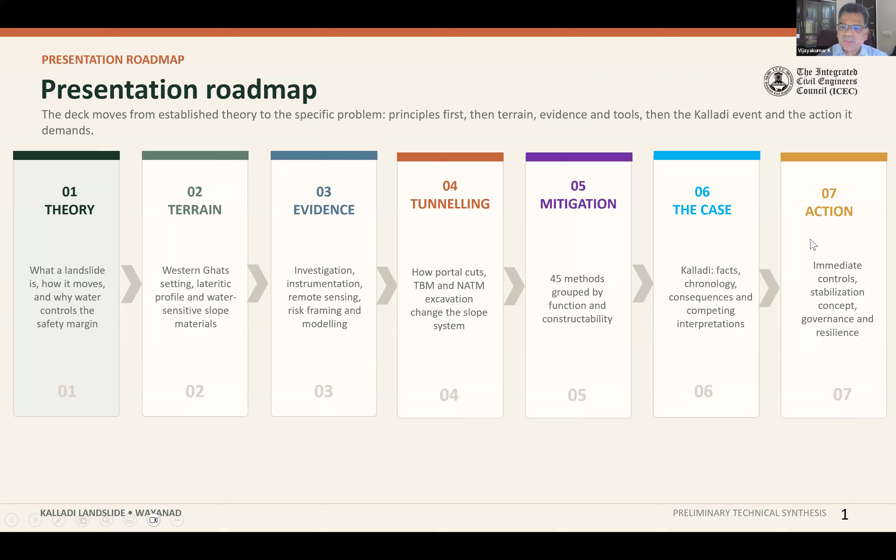Then evidence-based and important caution - these are from the text we will discuss. This is the Kalladi case briefing and landslide in practice. As I told you, there are 45 methods in that mitigation catalog.

So landslide dynamics, classification, monitoring, susceptibility and risk, soil nailing, bioengineering, numerical modeling comes under theory, practice and modeling. Points like location, preliminary event facts, rainfall and groundwater, competing interpretation, warning, construction, and governance lessons come under Kalladi case briefing. Investigation, groundwater, shear strength, stability analysis, 45 stabilization methods, construction control, and case history learning comes under landslide in practice.

So the caution is, please note down this point. Reported casualty, rainfall, and warning information is presented as a dated public record. The expert committee's final reconstruction should govern any legal and definitive attribution of cause.

Now the executive takeaways - there are 5 points which I want to highlight. Trigger is not a cause. Intense rainfall may have triggered the failure, while geology, slope disturbance, drainage, loading, and warning response practices shape susceptibility. Then mechanism first - slip surface geometry, classification, water regime, and movement mode must be established before stabilization is chosen.

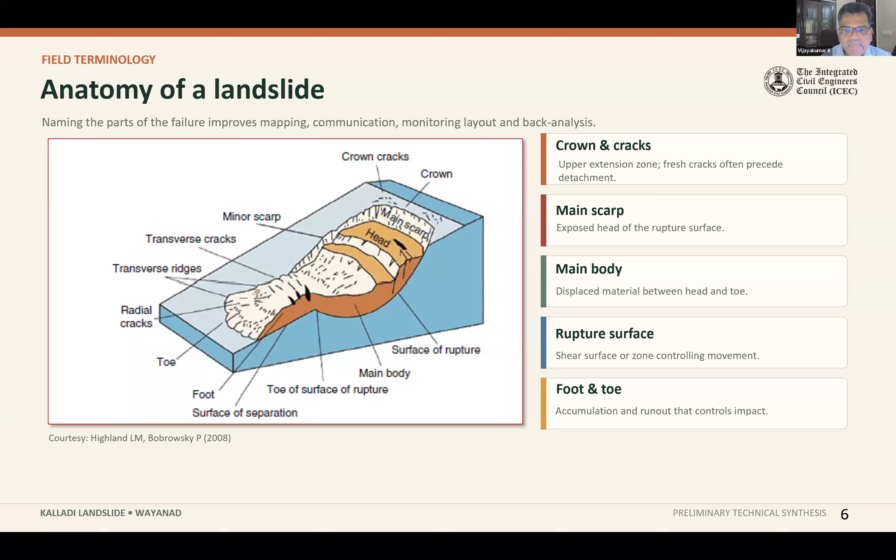As we discussed, there are six types of movement. First is fall. Fall means imagine a rock boulder falling from a high elevation to a low elevation, so it will bounce or roll. That comes under this category, falls.

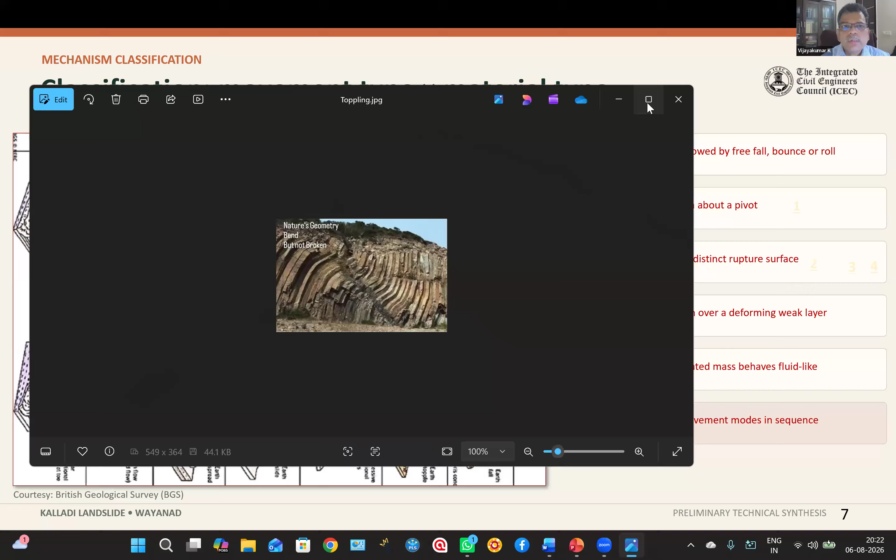Topples - I will show you a picture so it will be easy to see. Yes, it is visible. So this is the topple. Topple means there will be some type, for example basalt - columnar basalt. Once you excavate this, it will topple. You can imagine that. So this type of movement mode is called toppling.

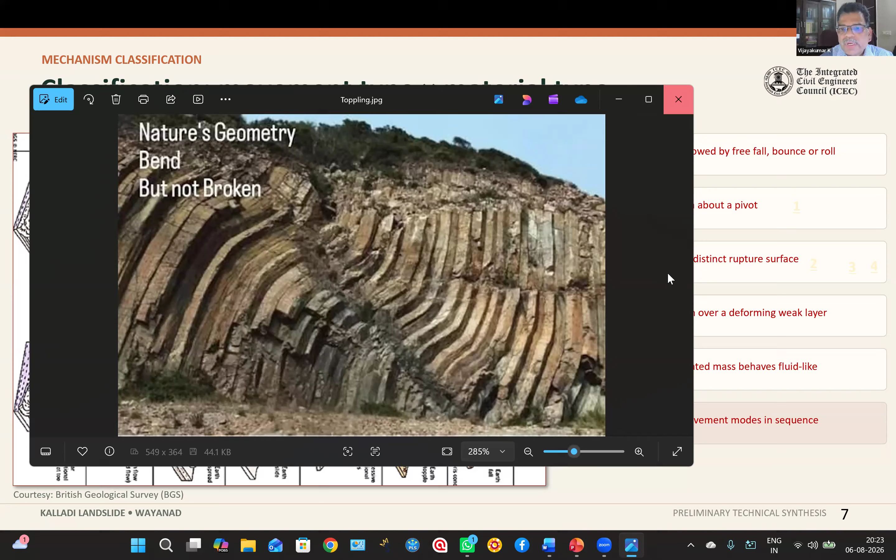Then slide - this is the toppling shown in the second column from the right. And in the third column, there are six main columns. This slide can be translation along a plane or rotational. I will give you a picture of this slide. I hope it is visible. Yeah.

So this rock can move along a plane, so it is called planar failure. The rocks - these are the joint sets actually - so it can move along a plane. This type of movement is called planar or slide. This particular slide is called planar failure, which may lead to planar failure.

Then another thing I would like to show you is circular failure. This is rotational - see, this is rotational. There will be a surface arc type of thing, and it will slide like this.

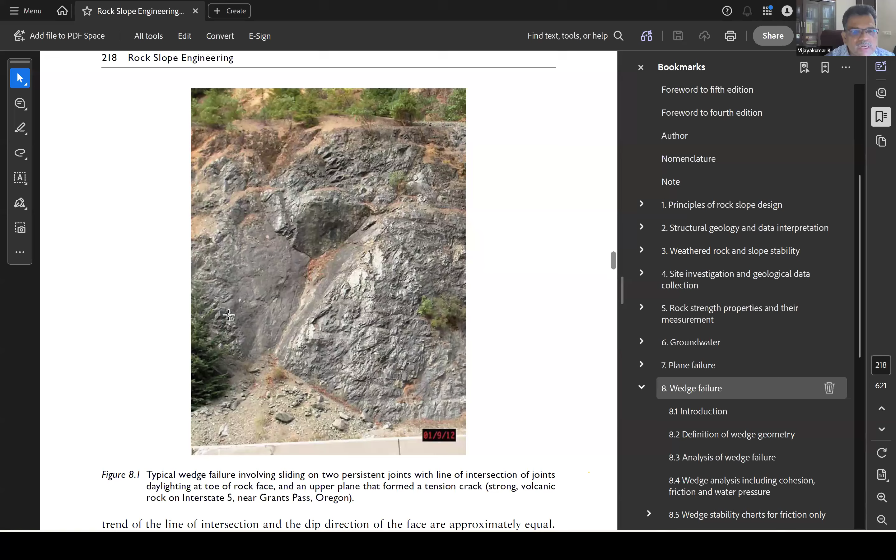Then another type of planar failure is wedge failure. I will show you that one as well. In this wedge failure, you can see it forms a wedge. There are two planes and a third plane, that is the scarp we told about. So this type of plane failure is called wedge failure.

Now next is spread. Spread means lateral extension - here it can be seen, lateral extension spreads. Flows means it is remolded, the material is remolded, saturated mass behaves fluid-like. And the last one is complex - complex means two or more modes in sequence, either of these two modes or more than that.

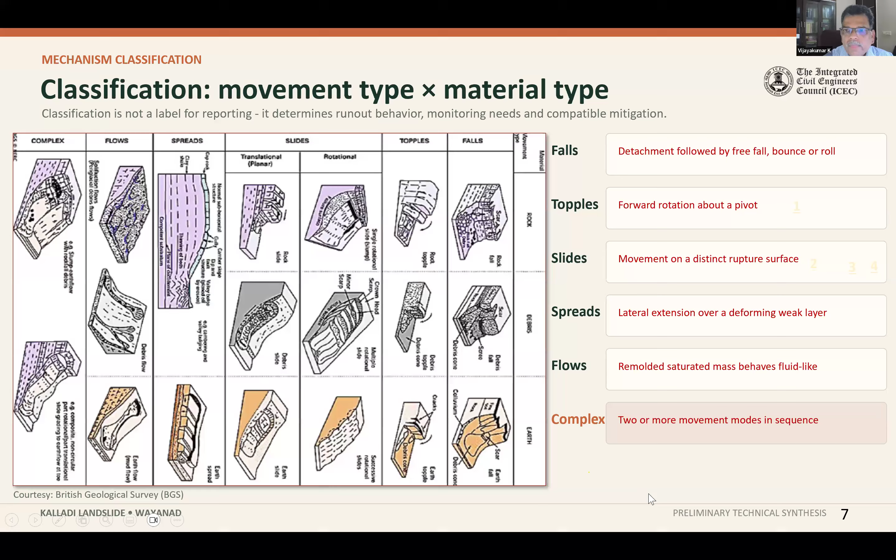Now let us see the velocity. We told movement type, then type of landslide, and then the third one is the velocity.

Water-rich failure can begin as a slide, remold, and entrain. Entrain means it fuels material and continues as a debris flow. Slide means, we already discussed about slide - a distinct rupture surface will be there.

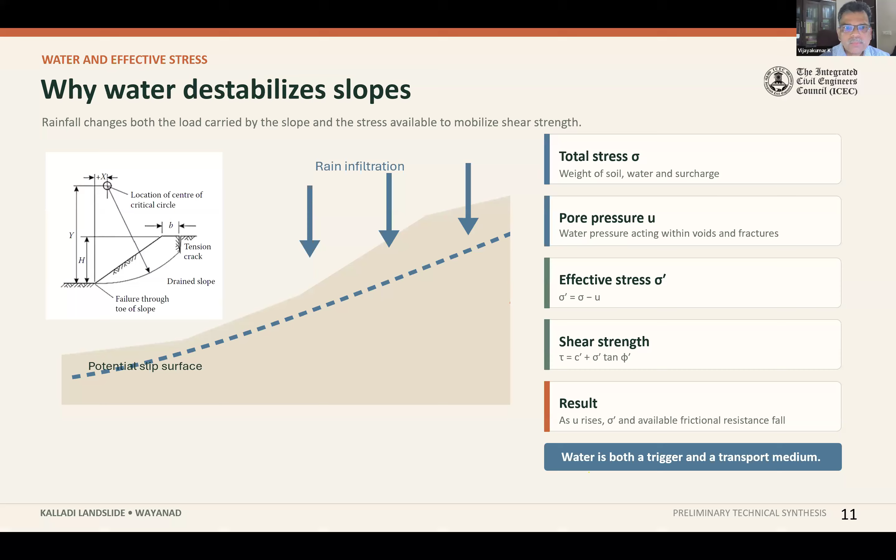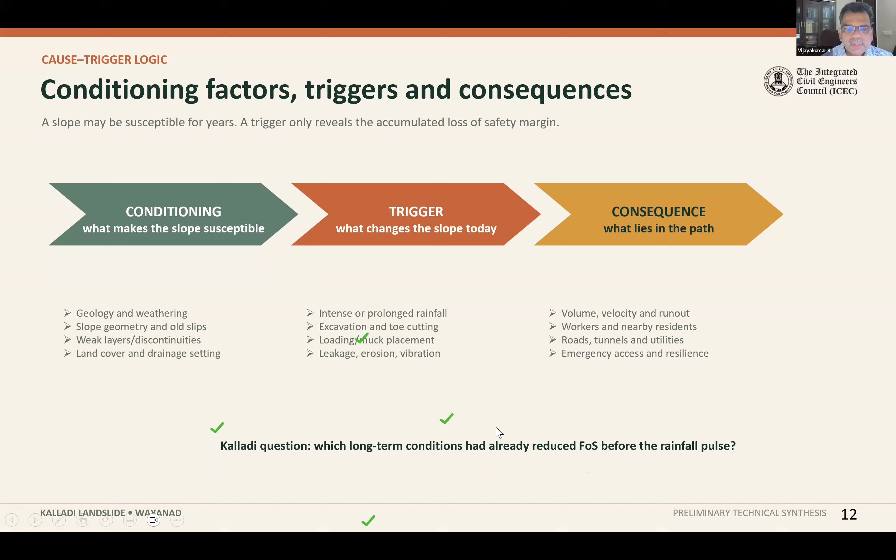Now let us see the field warning signs that require action. Small changes are valuable when they are documented, compared, and linked to an explicit threshold.

Cracks are actually not costly to find, because even with the naked eye we can see them. I will show you a picture from one of the projects in Assam.

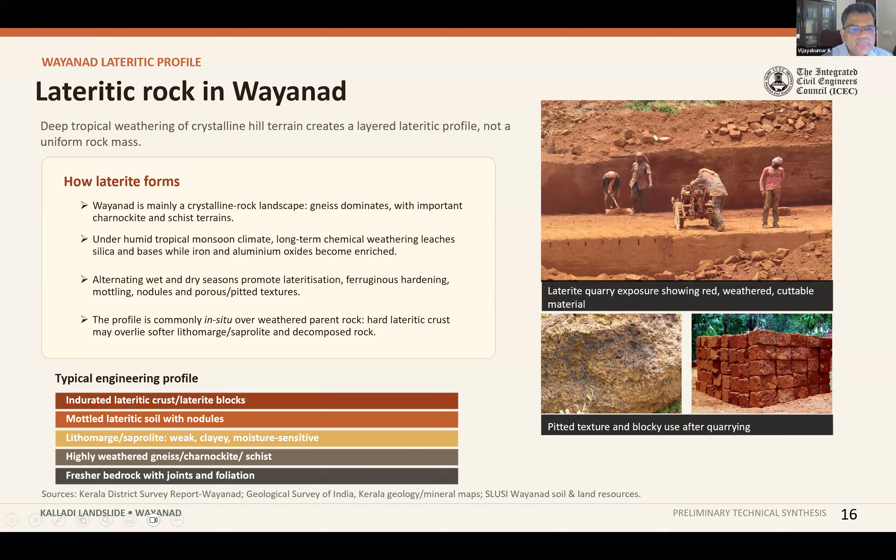The peculiarity of saprolite is that it is weak, clayey, and moisture sensitive. It can absorb water. This next point is about lateritic soil overburden and slope stability.

Hard crust can give a false impression. So while drilling a borehole, if you get a rebound, we should not stop there, because it can give a false impression of strength, while the underlying saprolite is very weak, then jointed with parent rock further down, and fissures are present. We will discuss that point.

Then cut slope exposes the profile and removes confinement. If you cut a slope, the confinement will be removed and allow rainfall to enter cracks, benches, and unsupported faces. So here there are three points.

The last point is that blocks, boulders, and loose lateritic debris can be entrained during a slide. It can start as a slide, as we discussed, then it can transform into a flow, increasing runout impact. So we have to investigate.

The main point is drainage. Drainage is the basic method for making a slope stable. So without drainage, in this type of lateritic, soil, or material area, we cannot make a slope stable.

So here the checks for lateritic slopes are very important. Thickness should be mapped, permeability, seepage path, water table, and storm response checked with drains and piezometers. I heard that in Kalladi there were no piezometers installed.

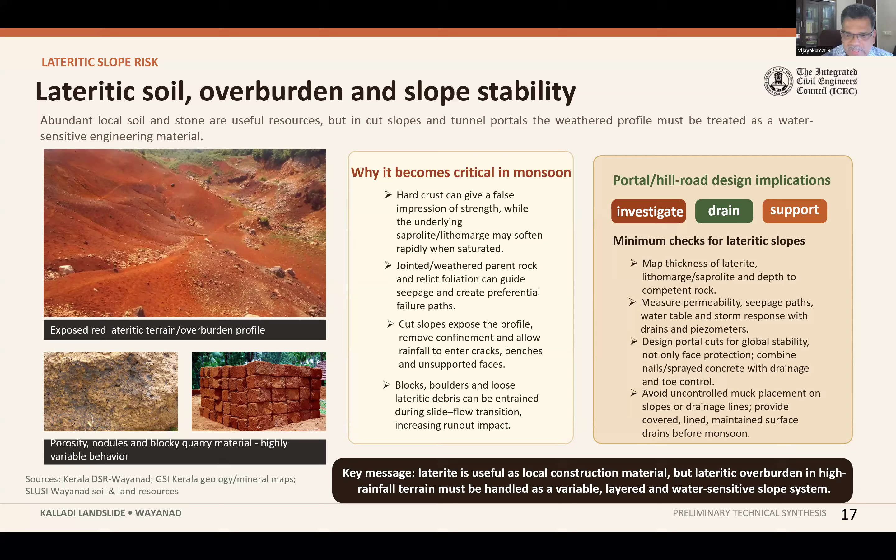When the cut removes confinement, that is, when we make a slope, the hydraulic gradient increases and water may heave, erupt as a spring, or trigger sliding or mud flow. It can start sliding and mud flow. All these should actually be part of forensic investigation, and all these things should be considered. They should consider it, obviously, I hope.

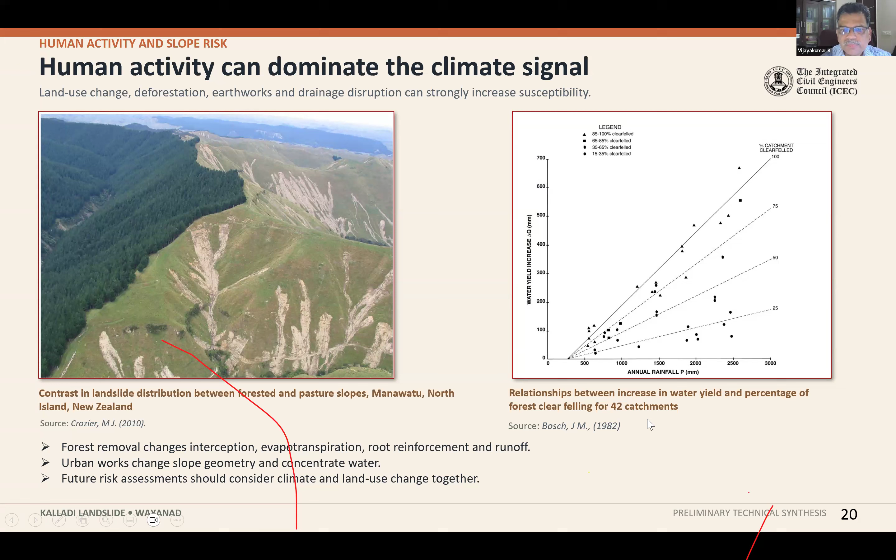So this is an article, and they have done intensive research from 42 catchments. Bosch, in 1982.

Now we talked about mechanics, then ground. Third section is investigation, monitoring, and risk. That is the proof.

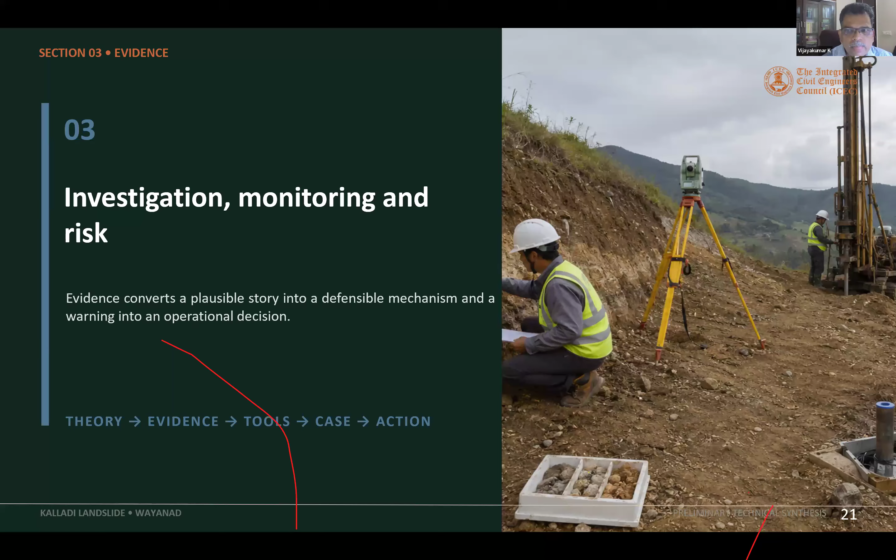So what should be considered in investigation? Geomorphology, the scarps we discussed. Hummocky ground means small hills or undulated grounds. Old slides, earlier slides were there that we have to investigate. Drainage lines, path, runout, topography, surface transport deposition geometry, and slope profile.

Ground profile, fill or colluvium. Colluvium is nothing but if the material is weathered and static, then it is called residual. So it's the second one - if it moves to the foothill, then it is called colluvium.

Weathered rock, sound rock, joint discontinuities. Orientation - joint orientation means dip and dip direction. Then persistence - what is the length of the discontinuity? Infill - what is the material in joints? Aperture - what is the gap of the joint? And water condition - groundwater seasonal level.

Usually what I've seen in a few geotechnical investigation reports is that they measure the observed water during drilling only, but we have to see the seasonal levels, perched water, seepage, and storm response. Strength of the material, peak, drained, undrained, residual strength, selected by mechanism, construction strength, cut geometry, support, stockpile - all these should be noted in the investigation stage.

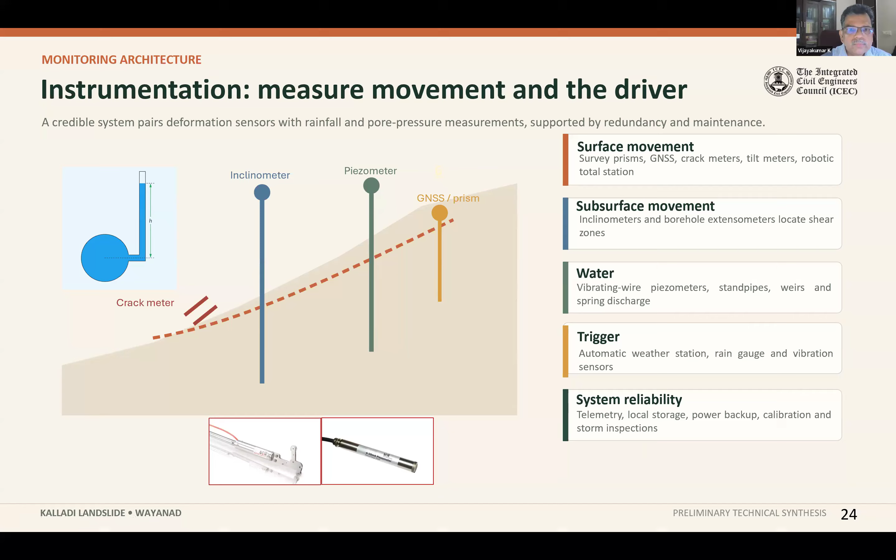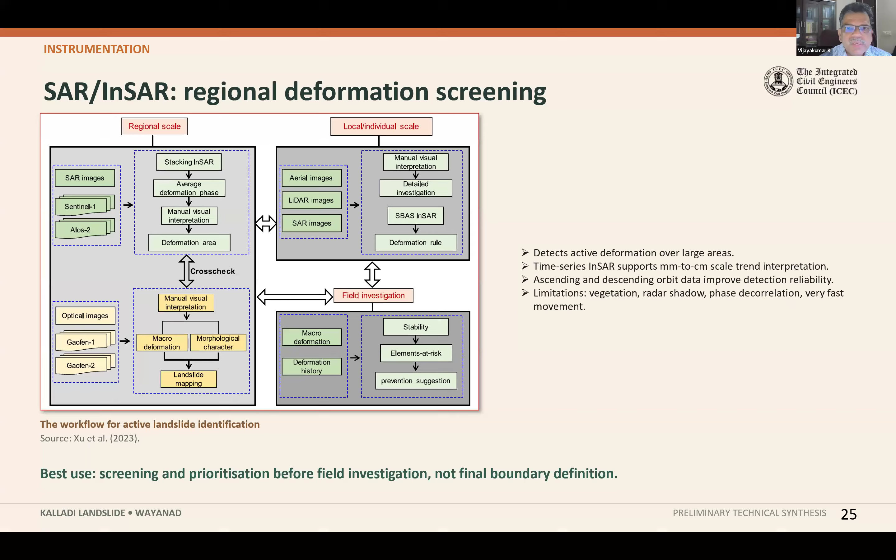Best use - screening and prioritization before field investigation, not final boundary definition. It's not a design tool, it's a screening tool only. Then threshold.

For monitoring, the threshold should combine rainfall, pore pressure, and movement rate, then be validated against the local response. I will go a little bit fast because we only covered 27 slides.

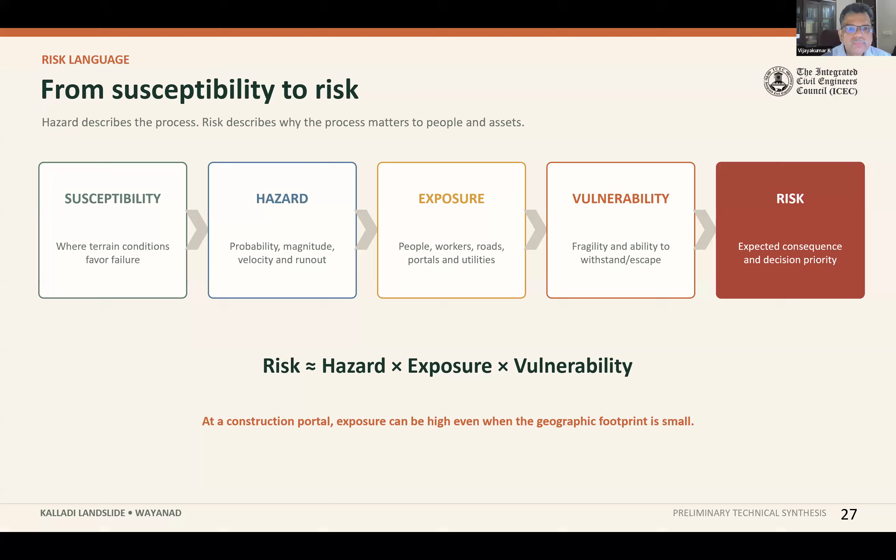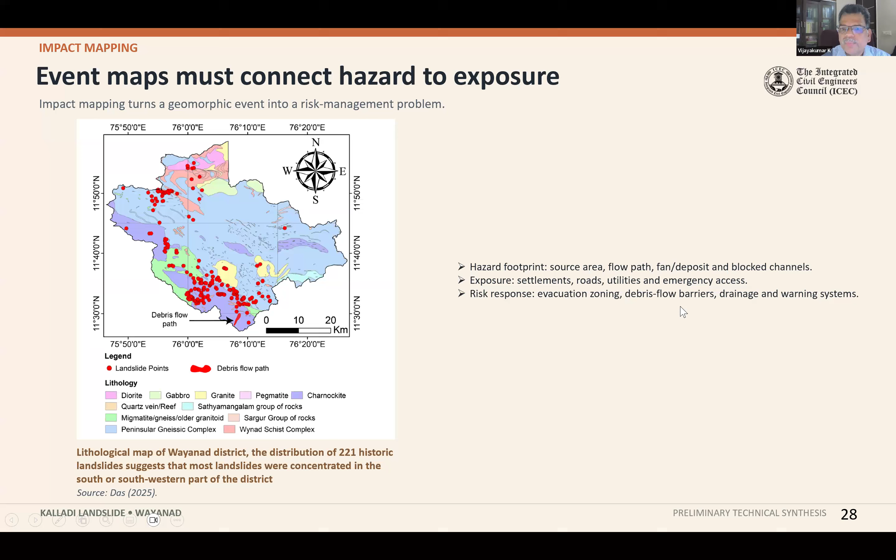This is the event map I took from Das et al., 2025 paper - source area, flow path, deposit block channel, exposure, settlement roads, utilities, emergency access. We told exposure in the previous slides. Risk responses include evacuation zoning, debris flow barriers, drainage and warning systems.

Modeling - for the modeling toolbox there are a lot of methods. One is limit equilibrium, which we usually use in GeoStudio or RS2, Plaxis, etc. There are a lot of methods you are aware of.

Janbu's method, Bishop's method - a lot of methods are there. Finite element using Slide or Plaxis we can use. Then finite difference - FLAC is one of the methods, one of the softwares.

Rainfall infiltration models will give transient pore pressure and shallow failure timing. Runout debris flow models give velocity, depth impact, and exclusion-zone design.

Probabilistic analysis - there won't be a single factor of safety, but there will be some reliability index or something like that. The most influential ones are groundwater condition, residual strength, slip surface geometry, construction sequence, and runout rheology.

Out of these five points, only four points are related to investigation, so investigation should be considered with paramount importance. Only construction sequence is left.

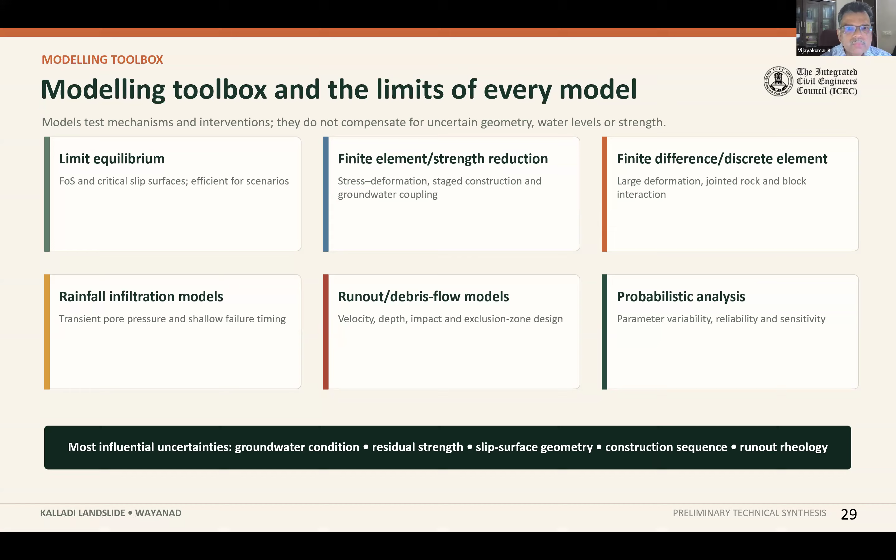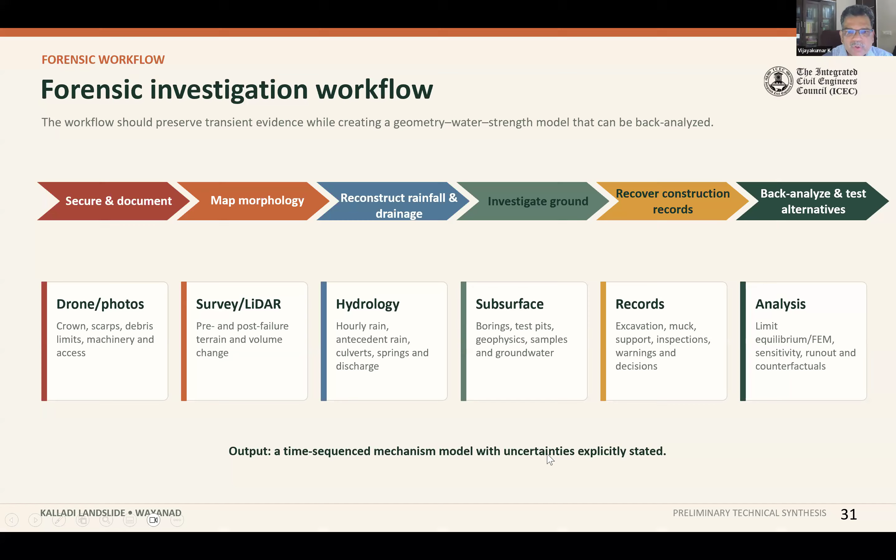Forensic investigation workflow - there are six drivers: secure and document, map morphology by survey or LIDAR, reconstruct rainfall and drainage hydrology, investigate ground subsurface through boring test pits etc, then recover construction records - that's an important point. Then back analysis, which we can do using limit equilibrium, FEM sensitivity, runout, and counterfactual - a time sequence and mechanism model with uncertainties explicitly stated.

Next is tunneling portal risk in hilly terrain - we'll go fast. I will discuss NATM tunneling only, because TBM is not considered in this region; earlier they have not considered it in the Kalladi region. The New Austrian Tunneling Method is one of the tunneling methods used in tunnel excavation, involving stress release. Then delayed support - suppose the support is meant to arrest the collapse; if you delay it, that will trigger settlement. Then groundwater inflow.

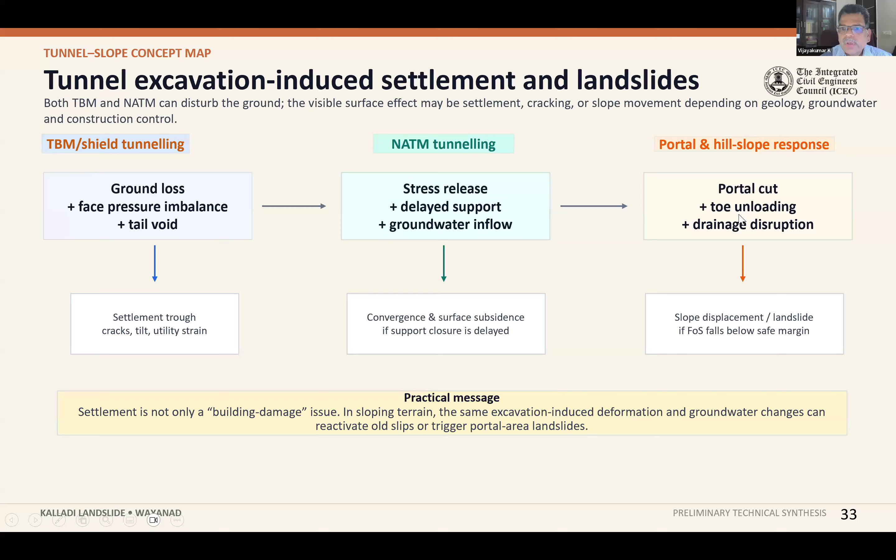Similarly, for portal and hill-slope response, we have portal cuts, toe unloading, drainage disruption - this is for settlement. I will skip this one because this is for TBM settlement, and for NATM we can see controls.

We can reduce the round length - how much quantity we have to excavate in one round. That can be reduced using pipe roofing or fore-poling spiles etc, face bolts and drainage holes, rapid rings. These are some remedial measures to reduce excavation settlement.

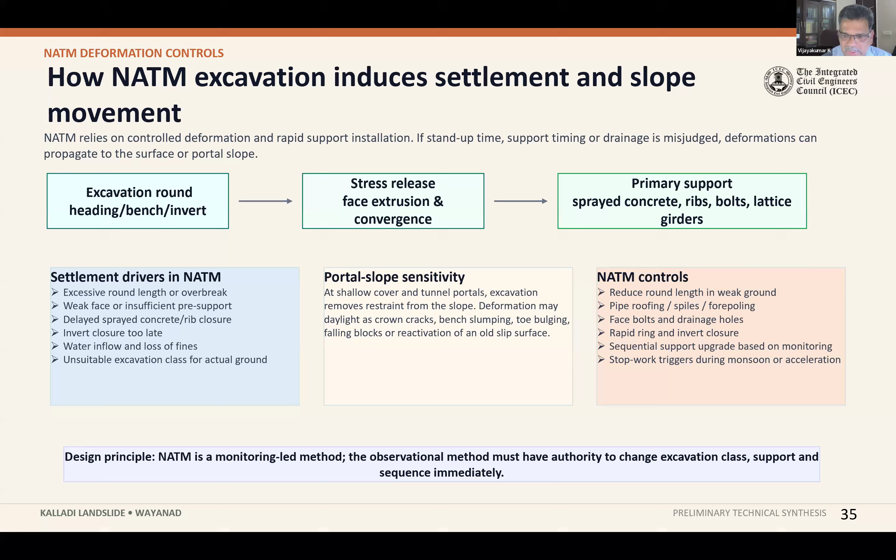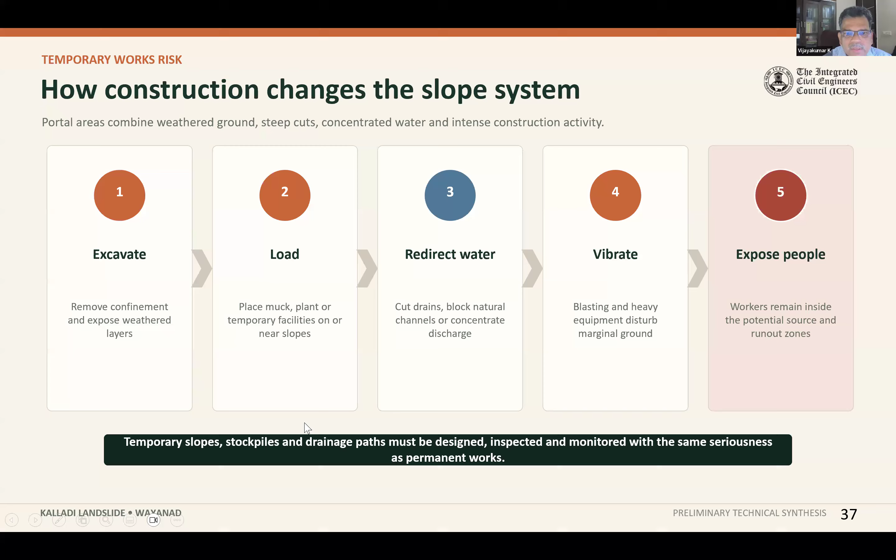I think I can share the slides, madam, so the people can read through. Yes sir, later this can be read at a later stage since we have few minutes - maybe we can skip to the Kalladi's slides.

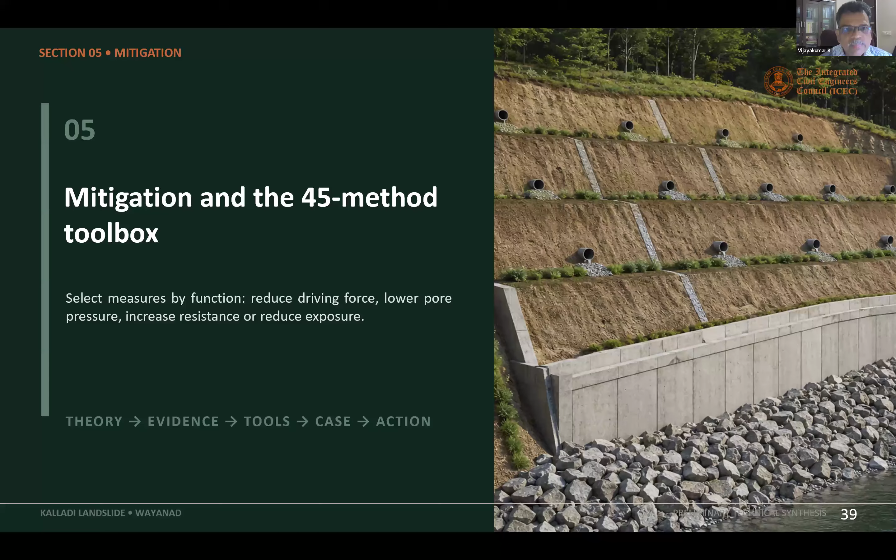So next, there are seven divisions; the fifth one is mitigation, with 45 toolbox methods. I will skip this one - we can read it later. One point I would like to highlight is that out of these 45 methods, 13 methods are related to drainage and dewatering, which shows how important it is.

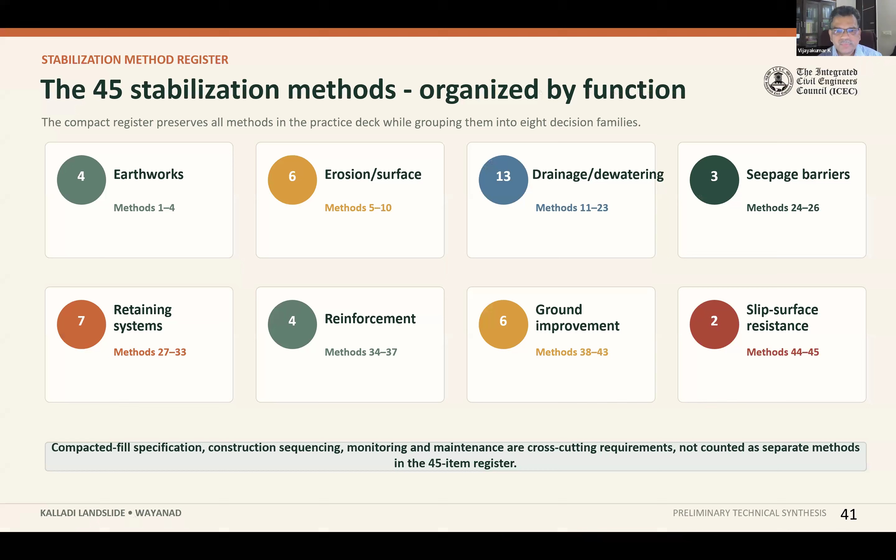So I have mentioned all the methods, mitigation methods. So this I will skip. So here I would like to say something.

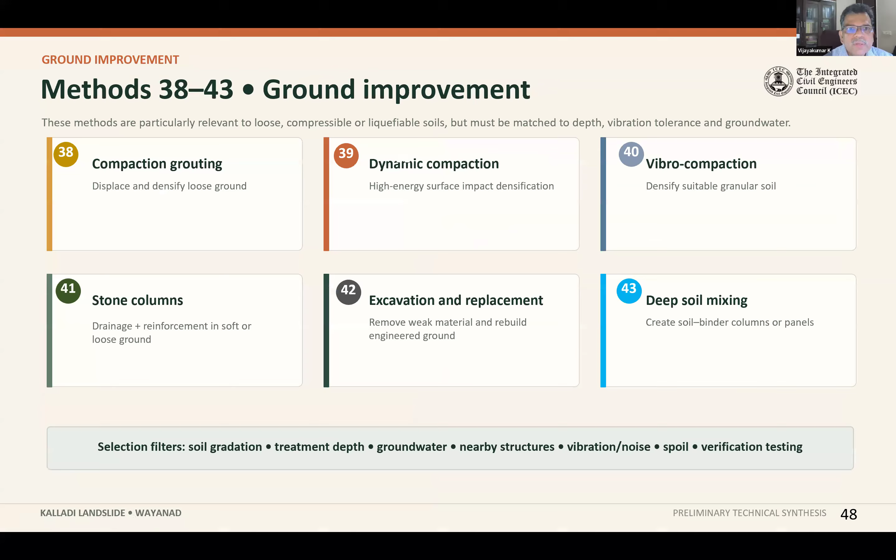Now we will see these are the 38 to 43 methods, 44 to 45 methods, and then where to use, what method to use under which condition. So this I have explained, I tried to explain here in this slide.

Then Kalladi, this is the case actually. So we know all these things. So it happened in July, 7 to 8 reported deaths, 9 reported injuries, and the contractor says it is because of natural calamity. I will just show this letter from the contractor to BC Limited.

They mentioned that it is because of natural calamity and 265 millimeter of rainfall in 24 hours. So here my point is that we have to see the antecedent wetness as well. Not only the 265 millimeter in 24 hours, we should consider the antecedent wetness also. So in the forensic investigation, that should be considered.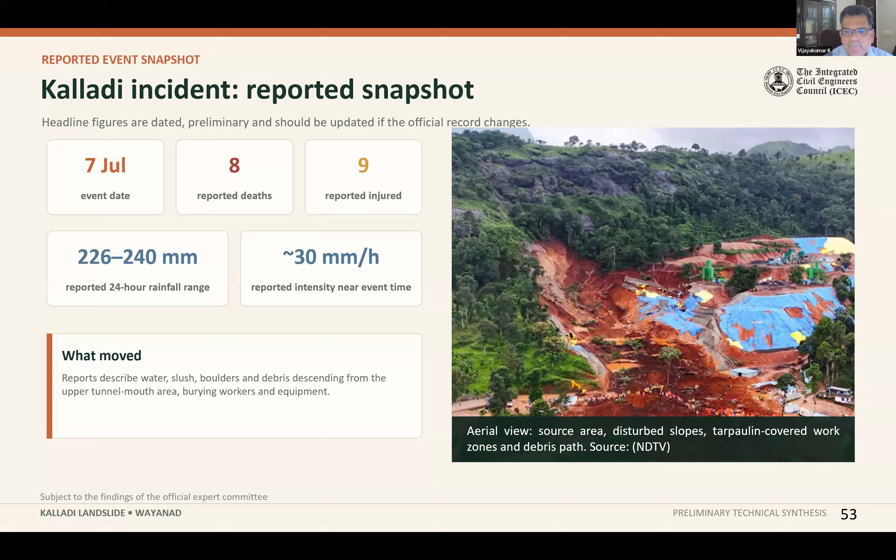So Kalladi event, 5 interacting systems. One is terrain, we discussed about the terrain, it's weathered overburden, steep relief, joints, all the geomorphic features. Second one is rainfall and rain and construction, water intensity, antecedent wetness, infiltration, runoff, and pore pressure.

Exposure, a lot of people, plant, access below the slope. Then governance, whether stop memo has been given properly, or those type of things come under governance. Construction is portal cuts, temporary slopes, muck, drainage changes, and sequence, subject to the findings of the official expert committee.

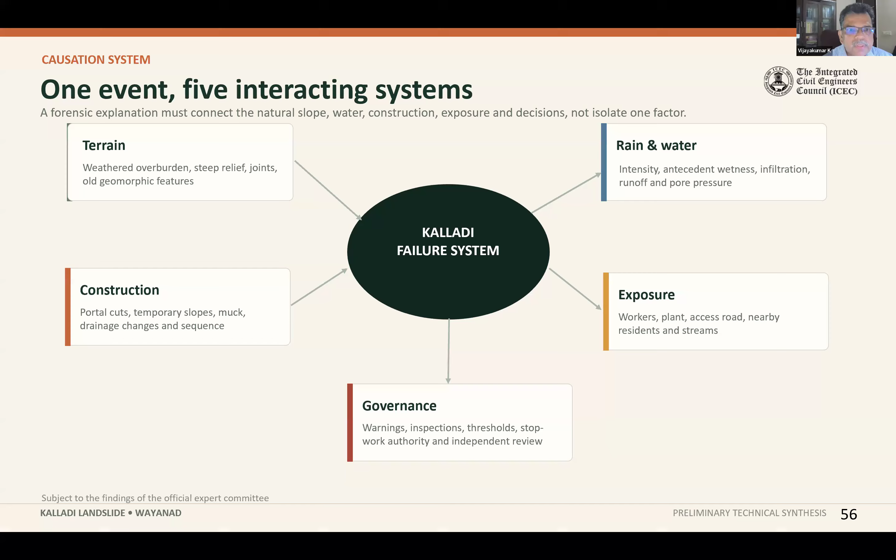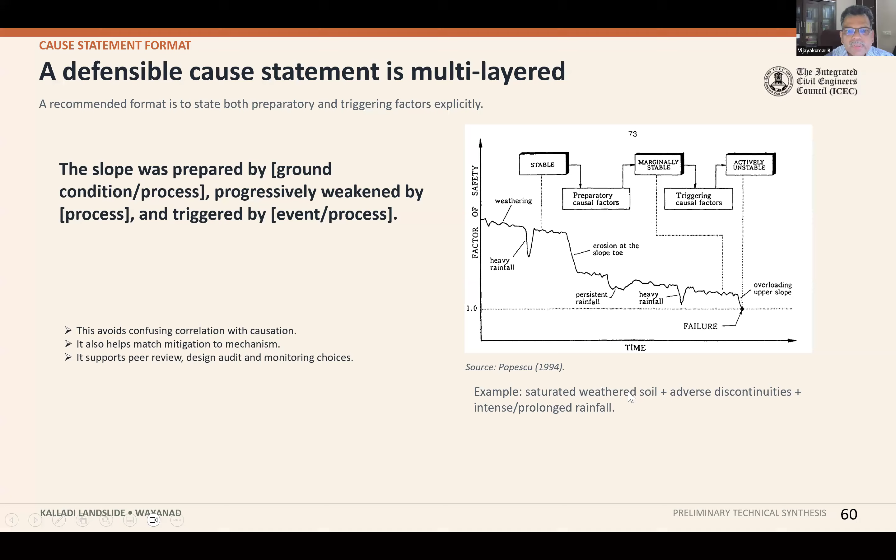So this is important. So if in the beginning stage it is stable, heavy rainfall, then persistent rainfall, it can become marginally stable. Then finally it becomes unstable, actively unstable. Failure and factor of safety is mentioned with respect to time.

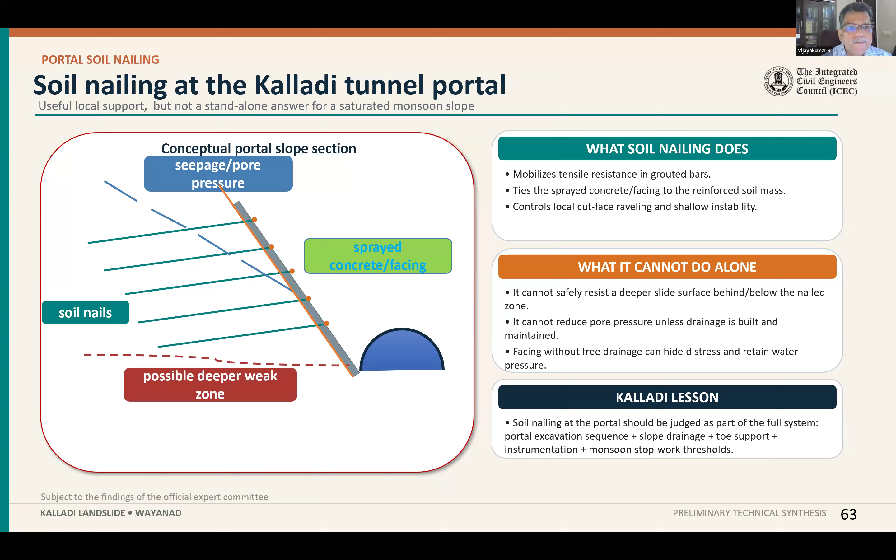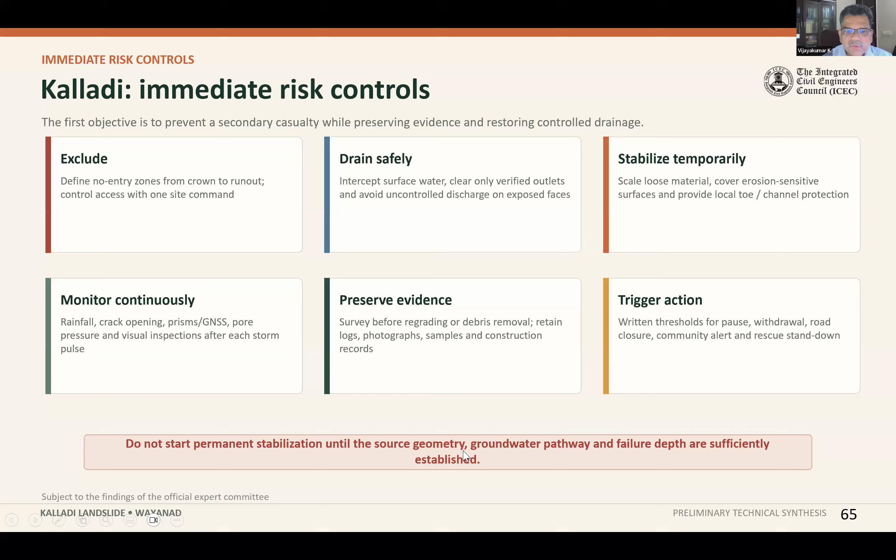So the last session, from findings to action. We should note that in the preventive measures already done, people already define control access with one site command, drain safely, stabilize it temporarily, monitor continuously, preserve evidence, take action. So do not start permanent stabilization until the source geometry, groundwater pathway, and failure depth are sufficiently established.

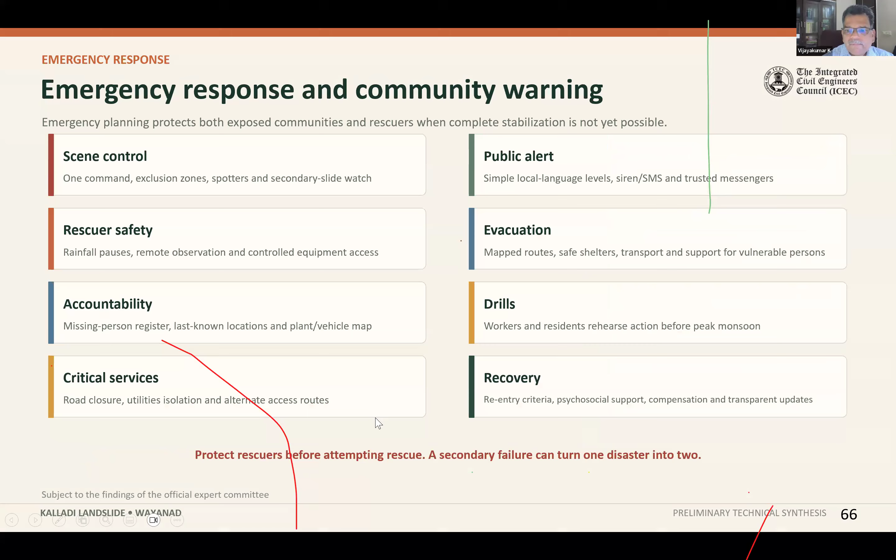Only a few slides are left, so this I can skip.

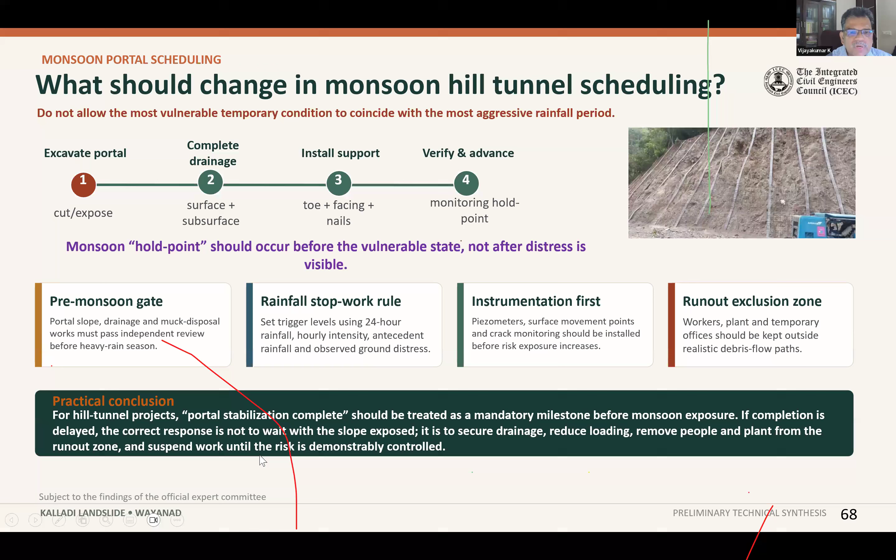So monsoon hill tunneling should have been stopped actually - that is one of the reasons I found, I think. So the practical conclusion is, for hill-tunnel projects, portal stabilization complete should be treated as a mandatory milestone before monsoon exposure. If completion is delayed, the correct response is not to wait with the slope exposed. It is to secure drainage, reduce loading, remove people and plant from the runout zone, and suspend work until the risk is demonstrably controlled.

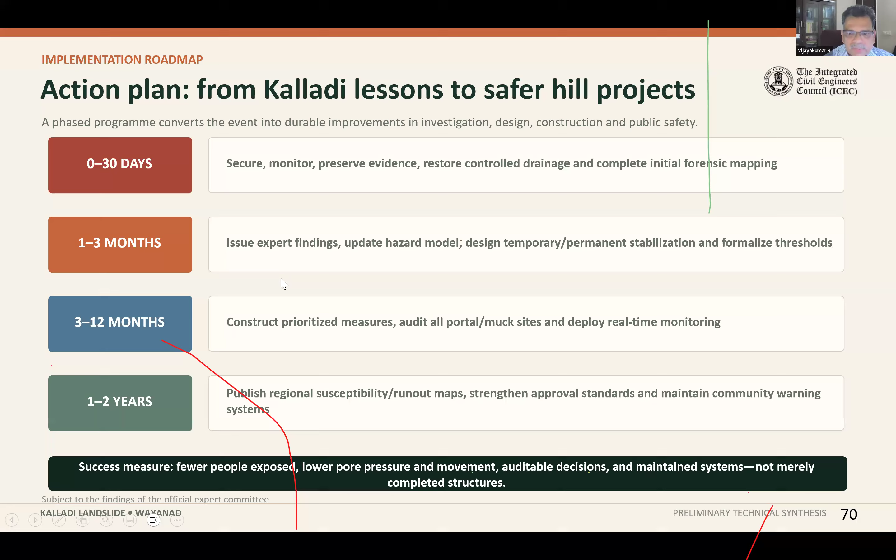So my last point, or final thought, is India needs tunnels, mountain roads, and other infrastructure in challenging terrain. The lesson is not that fragile landscapes should remain undeveloped, but that development in difficult ground must be guided by rigorous investigation, conservative design, robust support, effective drainage, continuous monitoring, and timely intervention - not by optimistic assumption. So the point is that difficult ground demands stronger engineering, greater vigilance, and timely decisions.

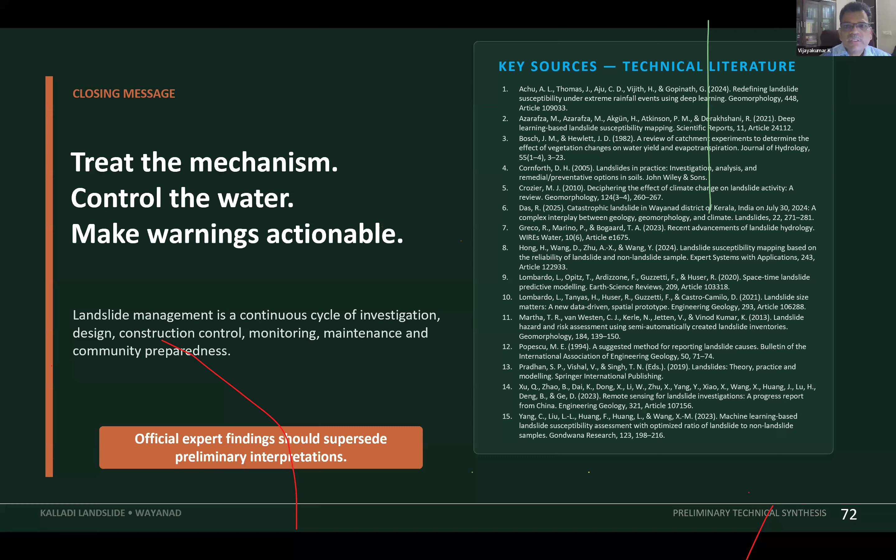So these are the references I took from the literature - these are the reports, papers, e-papers, etc. And the last point is, let us strive to establish a safer and more resilient future. Thank you.

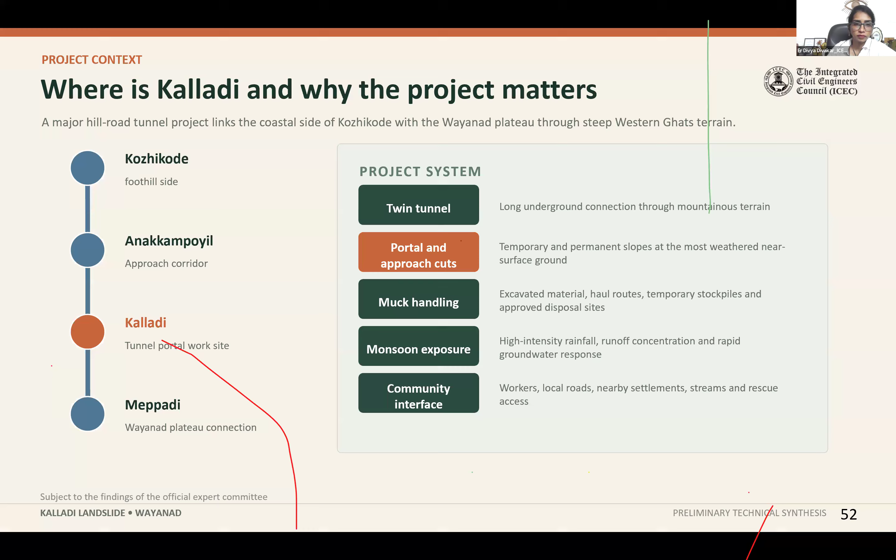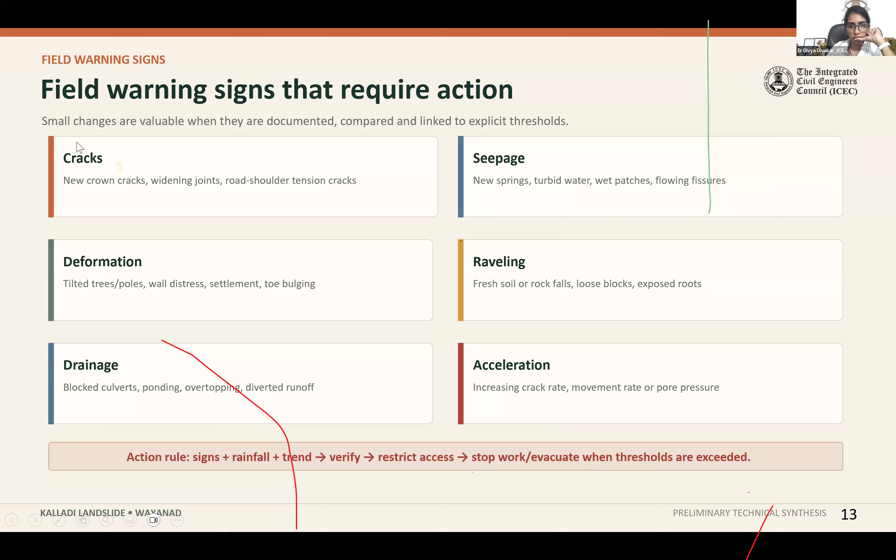My understanding is that the crack should be monitored continuously. If any further movement is there, that is a risky crack. See, this crack was earlier very small, very minor, then it expands. This tension crack expands - now see the width of the crack. This means in due course it will fail. So it should be monitored continuously. By naked eye also we can see that - earlier it was a very small crack, then later on it becomes like this. So continuous monitoring is required.

Sir, to add on to this - usually, especially in the case of retaining structures, in the vicinity, due to poor soil filling, we will be able to see some local movement or settlement. At the same time, we will be seeing visible cracks as well. So when we are monitoring these progressive cracks, when should we be very vigilant - should we focus on the lateral movement of the retaining structure, or just on visible cracks seen on the filled earth? No, sorry for interrupting.

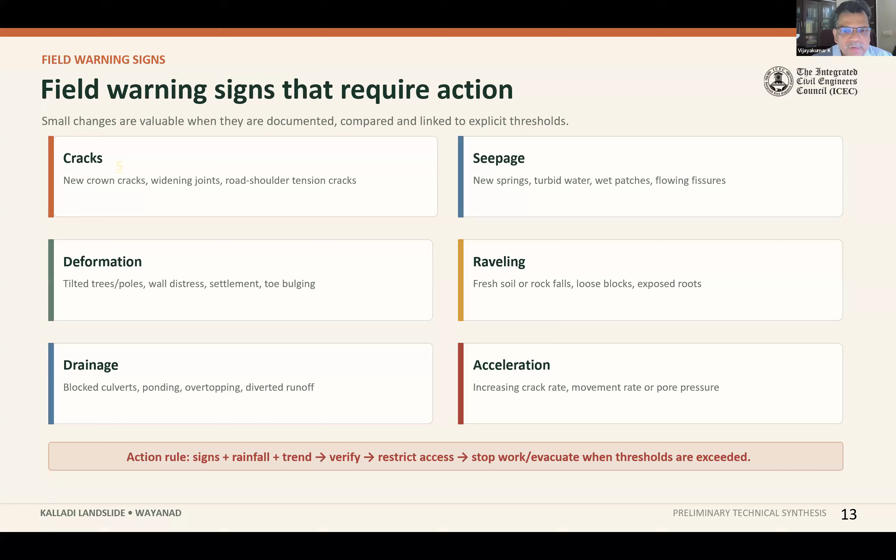Actually, should I close this one? So there are a lot of things actually - we mentioned in the warning signs here: widening joints, and here also distress, wall distress, settlement. All these are actually warning signs. If these are related - cracks and seepage, deformation - these are medium, and this is the worst condition - drainage and acceleration. So my point is, I think I have explained properly, or do you need any clarification? Yes sir, on this - this is enough, this is good to go.

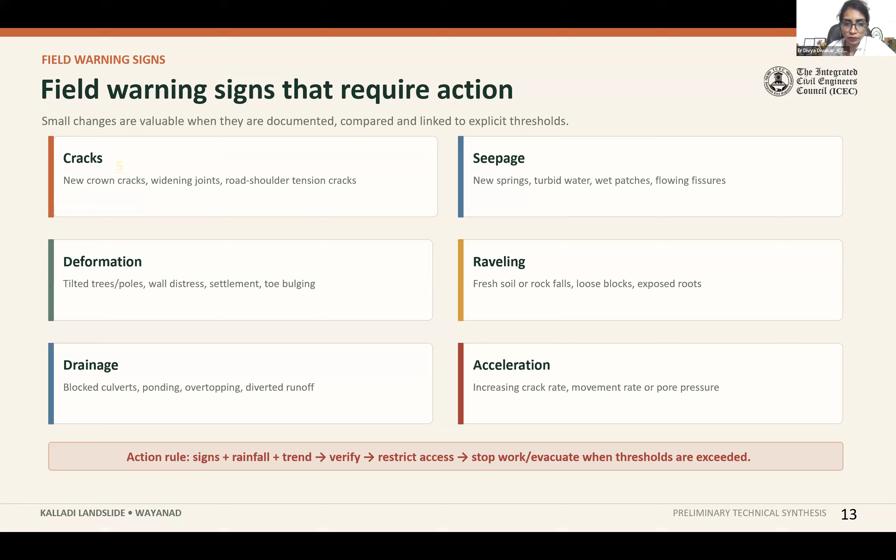If the slip circle is of a very large radius, then is it possible to do soil nailing? Is there any limit to the length of soil nailing? Yeah, that's a good question actually, but with such a slip circle, it will become a global failure. There are three types of failure: base failure, face failure, and toe failure. So this becomes a global failure. I don't have the photos now, but in Assam we found one hill actually moving.

One hill part is moving, so the three layers of roads are moving together. You cannot imagine - I have that photo, I will share with these slides. So it is a global failure. We cannot use any soil nail there because three layers of roads - one layer, two layer, and third layer - and all the hill is moving actually. So what I realized is that there are no people living there, it's a no man's area. They understood earlier itself that the hill is not suitable for living. So when the contractor constructed the roads, all are moving actually.

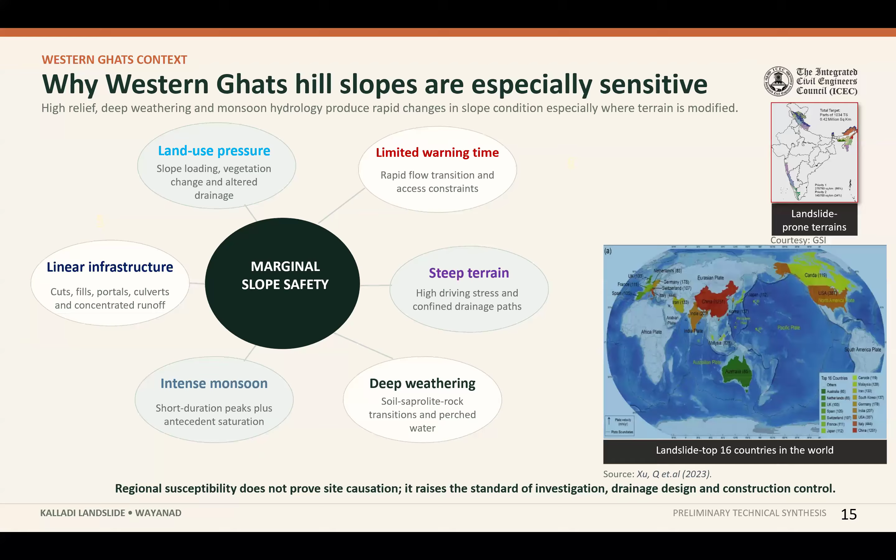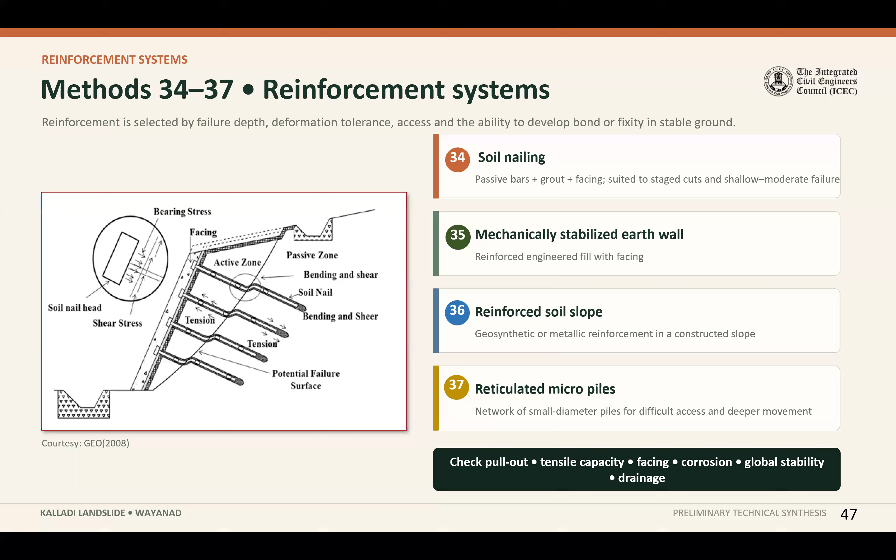One question is about the two arguments you are saying about whether it is man-made or natural disaster. For natural disaster, you told that the main point is that we have to check the main crown, the source location, and the continuity, sir. This is one of the points. I don't know whether you have gone through the different reports from different geotechnical scholars and tunneling scholars - they have mentioned that this particular point is out of this project area. It is almost 100 meters - some are reporting 100, some 150, some saying 80, 90, something like that. So the contractor is arguing to the same extent that this is actually natural disaster. Could you put some light on this particular issue, sir?

Actually for finding, you are talking about interpretation A, right? Yeah, yes sir. So this point should be tested actually - we know the crown, source, location and continuity, that is not finalized yet, not found out yet. That's actually found based on the different scholars on the basis of Google Maps and all that. No, actually sorry to interrupt - we have some other investigation methods we discussed, so based on that method it has to be found out. Then natural colluvium or paleoslide geometry, that also has to be found out - whether earlier slides were there, that we don't know. And one more point - it may start actually as a slide movement, later on it becomes flow.

Yes, absolutely. Second thing you mentioned during the presentation - you said that if it's a catastrophic type of issue, then the flow is in meters per second type. But from whatever reports we have gone through, we have seen them claiming that the contractor itself claims the distance covered by the debris is almost 500 meters. Some are saying 600, some 700, but we can minimize it to 500 or 400. They're saying in 400 meters it has covered in 4 or 5 seconds. So that is one of the arguments from the contractor side, sir. So what is your view about that?

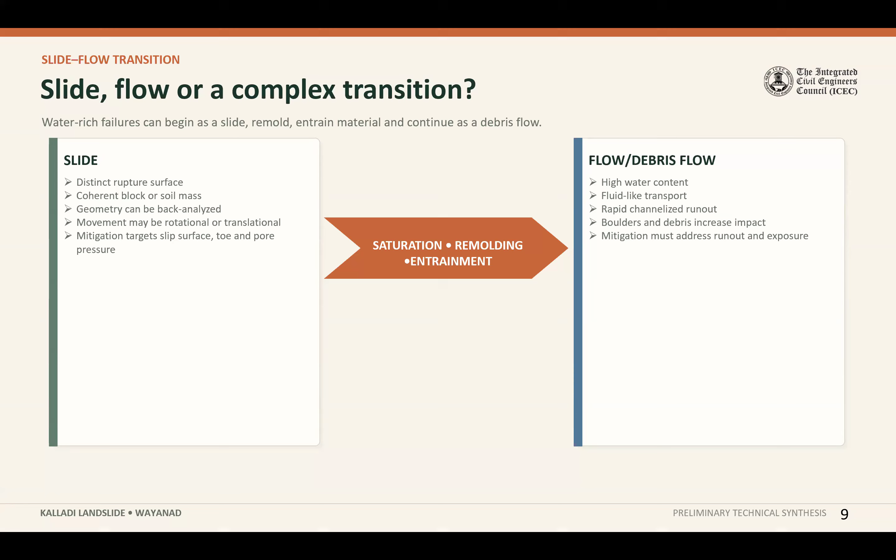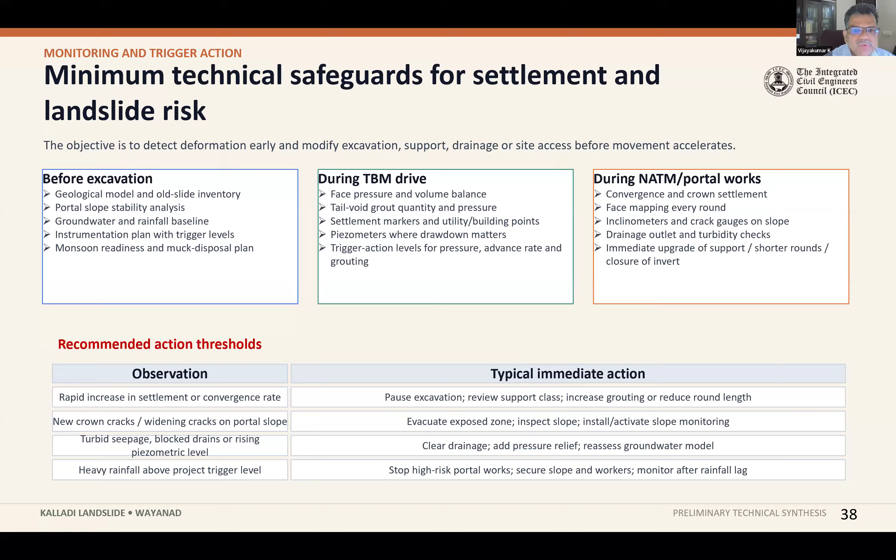So my argument is whether the contractor who's claiming that it is catastrophic - whether that is the only scale where we can measure the catastrophic flow, or do we have other means also. We can check other points regarding the catastrophic flow, or landslide, or man-made disaster. Actually, in totality we have to see, we cannot support just one argument, because officials also see the second argument. So only after completing the forensic investigation will we be able to come to a conclusion.

See, this second point also, kindly go through.

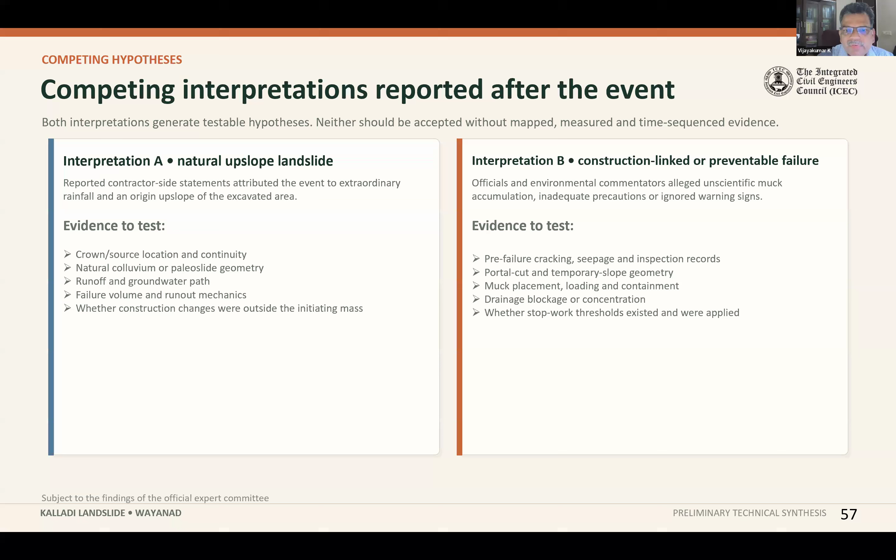Sorry. So the other argument, interpretation B, should also be considered - muck placement was there as per the report. There should be some defined, demarcated location for muck. Even in forest areas, when I was working in Kerala, we usually consider some amount for firewood - meaning we should not cut even one small branch of trees. So there should be some firewood amount also considered in the estimate, so that environmentally it is clear. Muck placement should be in a designated area only. So they will argue with that point.

Sorry to interrupt, sir. Another thing - in the media itself, I heard the Kerala Chief Minister say in this report that earlier there was some confusion that some muck disposal was on that side, but later on he clarified that this muck disposal is not there, it is not because of that. This was one of the news items I have seen, sir.

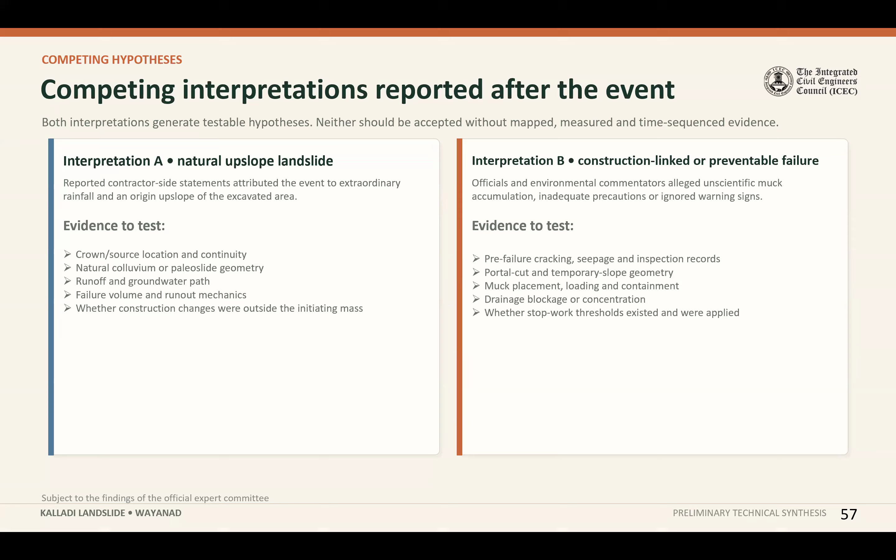These arguments - I don't know how the committee is going through these things. So what I got from this overall PPT is that finally the expert committee, or this technical-legal committee, will be the final authority who gives the final comments. Is it like that, sir?

Yeah, and one more thing I would highlight is the forensic investigation - what things must it establish? Where did the rupture initiate? So far, I think that is under investigation. What was the movement mode - slide, debris flow, complex transition, or progressive collapse? How did this happen? I think we skipped that.

How did water act - rainfall history, antecedent water, seepage, pore pressure, drainage concentration, and erosion? What did construction change - geometry, loading, toe support, drainage, and material pathway? What warnings existed - cracks, turbidity? We discussed warning signs, deformation, inspection reports, decision logs, and whether a stop memo was there. Could exposure have been reduced - work location, exclusion zones, stop work rules, and evacuation readiness? So all these points the committee should consider in the forensic investigation.

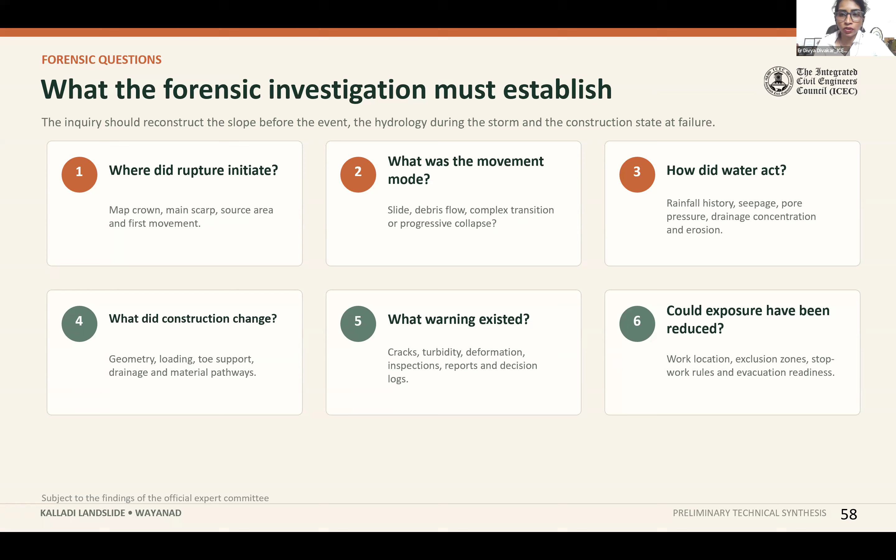Sir, actually my question is there are many cases in slope stability where, even if drainage holes are present, there are blockages happening. That is because the drainage holes are installed but not in proper usage. So is there any method to monitor it throughout the whole construction procedure?

Yeah, actually the pipe we use is a perforated pipe. Usually it's wrapped with geotextiles so that no material which is blocking the pipe will be allowed to enter. So usually we wrap it with geotextiles. If it is not wrapped with the designed geotextiles, then there is a possibility of blockage.

Oh okay, so if it is blocked, it means it was not installed in a proper way. Yeah, proper way. Usually, once in a maintenance period, they have to inspect the holes and remove the blocks if any, by removing the pipe or re-drilling. Once in a while, not regularly, maintenance is done because this pipe may not be durable for 50 or 60 years. So during maintenance it has to be removed, and we re-drill and re-establish the perforated pipe with geotextiles.

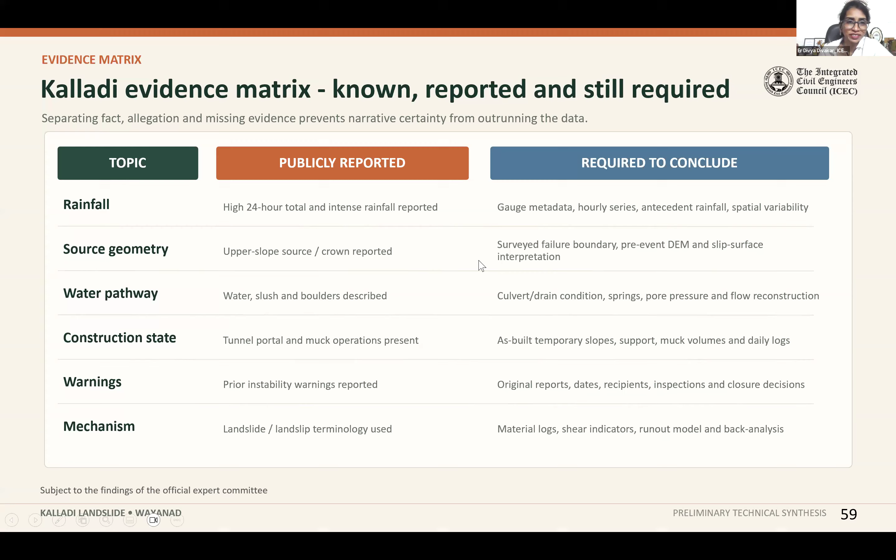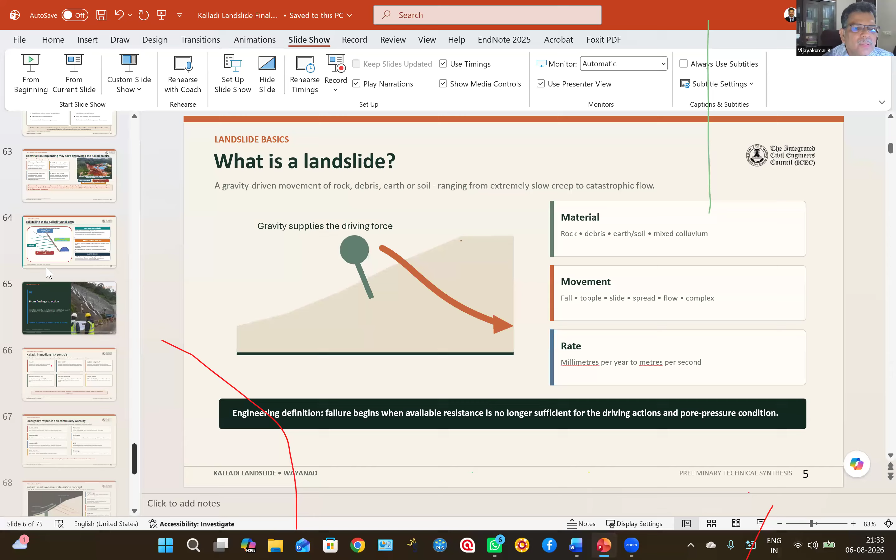Yes, so the question is: is the Western Ghats in the Wayanad region suitable for tunneling work? That is a basic question everyone is asking and keenly waiting to hear from you, sir. Okay, so I will show the last slide — maybe that might be the answer.

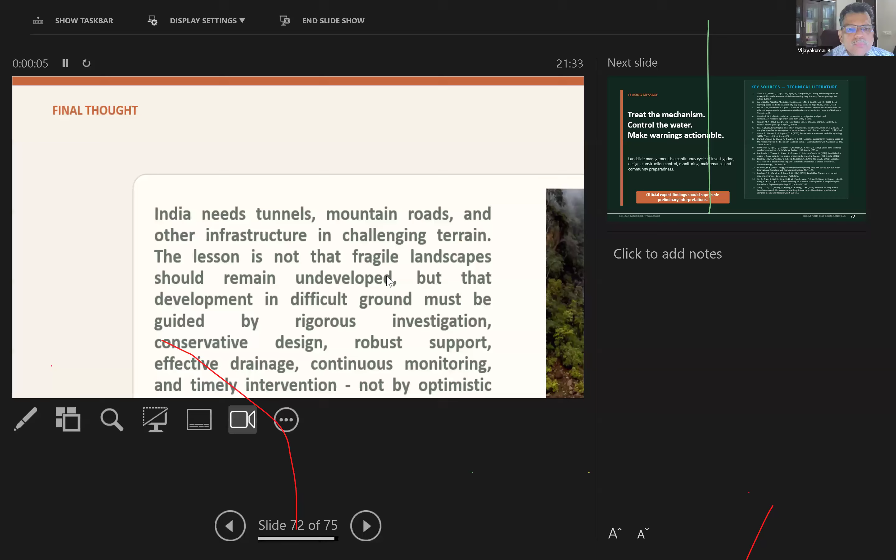Is it visible? Yes, very much. So we need tunnel actually. And for optimism, we should not go for optimism. We should do rigorous investigation, conservative design, robust support, effective drainage, continuous monitoring, and timely intervention.

Even in the northeast states, the Himalaya is the youngest mountain, everybody knows that. So there we are doing tunneling. We are doing tunnels in Jammu Kashmir too, all fragile areas, youngest mountain. In Kerala, only the lateritic soil and monsoon are the culprits, but the charnockite is strong, whereas in the Himalayan region, every 1.5 meters the geology changes. So we need tunnels, sir.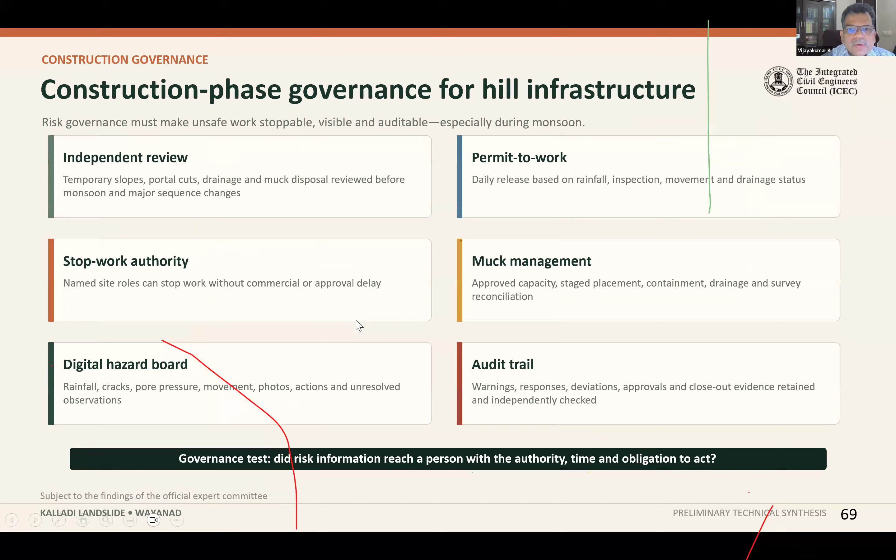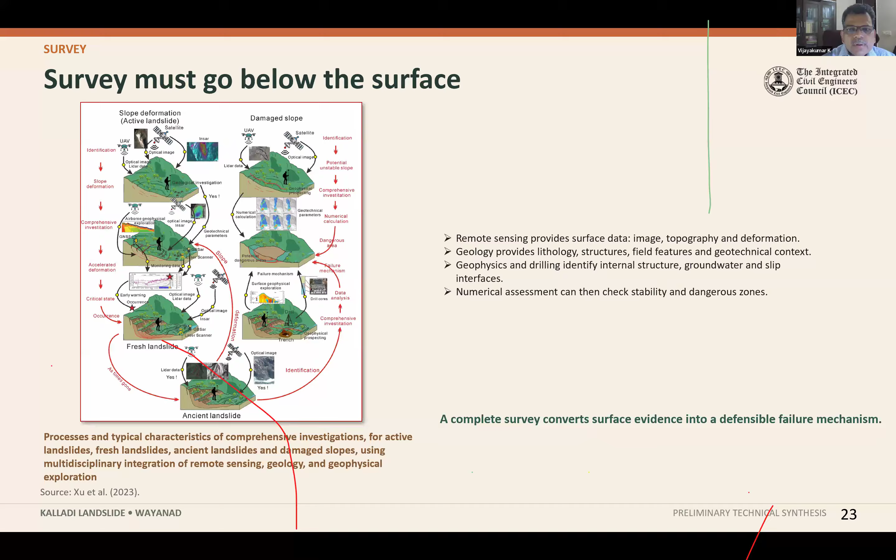Okay, so I will go to one slide. So the mechanics - the factor of safety, it is based on factor of safety, sir. The factor of safety is resisting force divided by driving force. So the resistance can be from C dash, obviously it is lateritic soil, phi dash, etc.

But let us think about demand. The slope angle you are talking about depends upon height and what is the unit weight, whether surcharge is there, erosion - all these factors we have to take, and we have to find out by using limit equilibrium method or FEM method. Then we will come to a conclusion that this slope is okay.

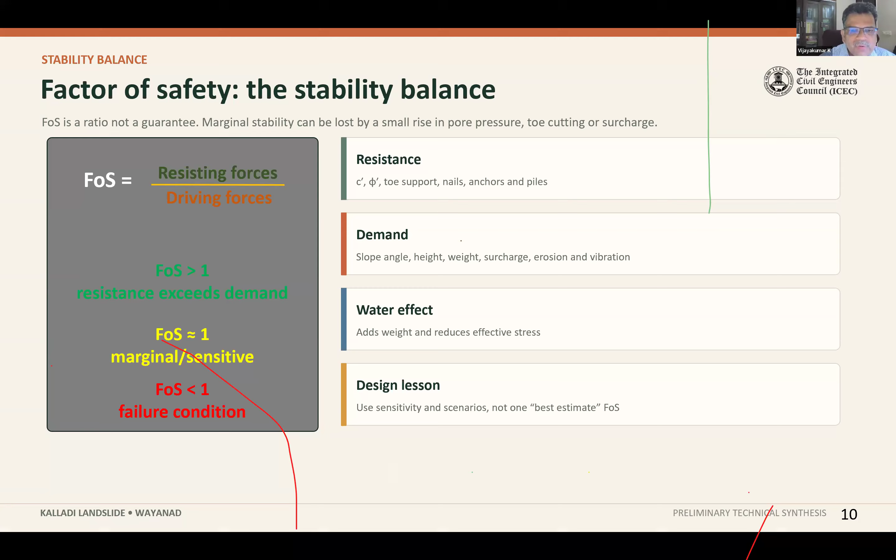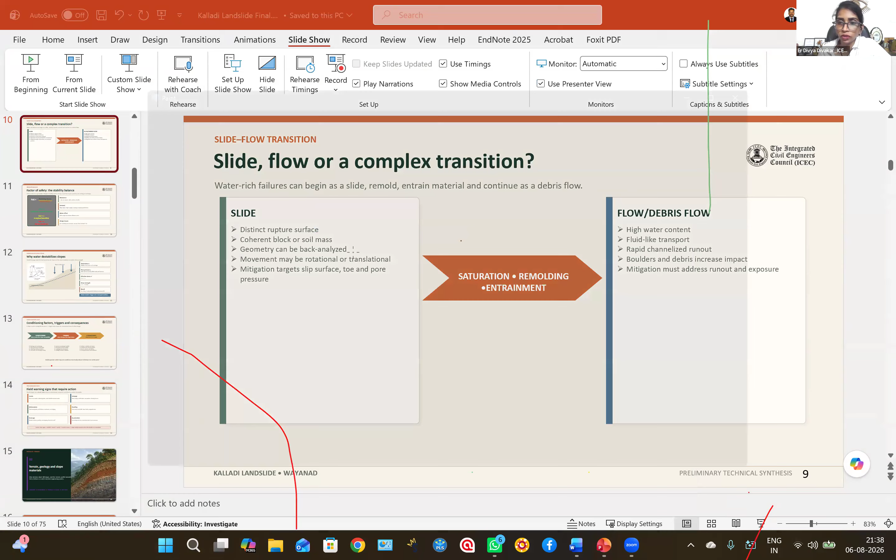Or otherwise what we usually do - can I use my paint, madam? Yes, sir. Everyone please note we will be concluding in 5 minutes. So if any question is there, post it immediately, otherwise we'll address it in a later email or message. So suppose this is the slope you want to make.

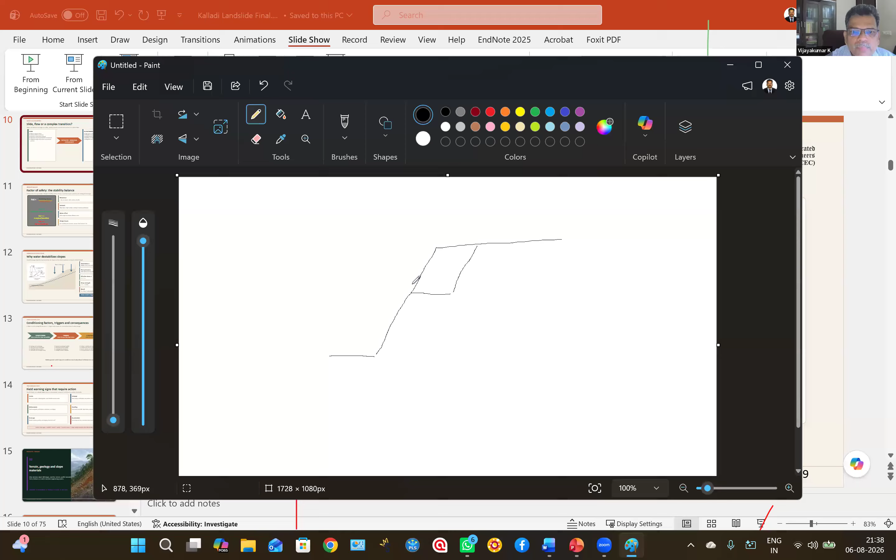There are some constraints, we cannot go behind this. This is the slope. So what we usually do is either reduce the weight - by providing a bench, this weight is removed, a bench is there. So likewise the slope can be maintained, but it depends, this is usually 6 meters.

So what is the slope? The simple answer is that it depends upon the height, material properties, surcharge. Suppose some road is there and vehicles are moving - all these points should be considered to arrive at a conclusion about what slope angle we can maintain. It cannot be answered in one word.

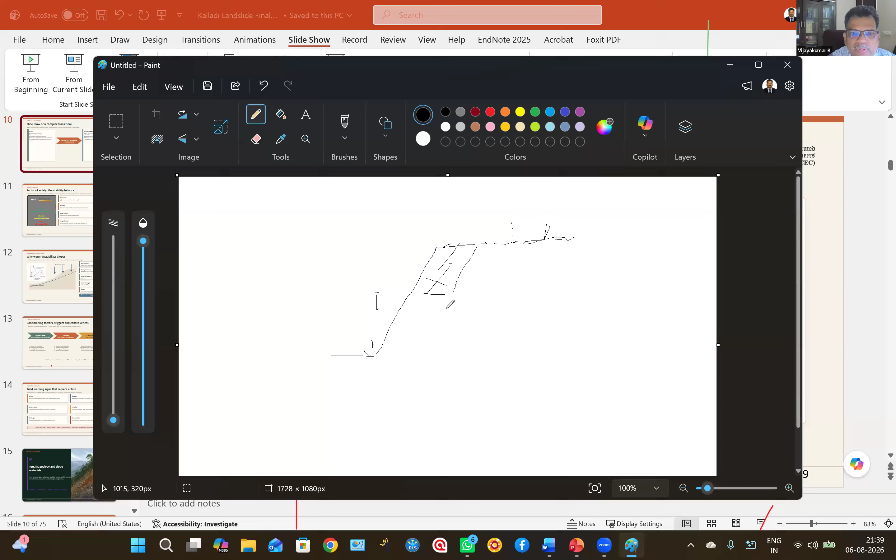Why? Because a lot of parameters are there, and if some water pressure is there, suppose this is the phreatic line, we have to remove the water using a drainage hole or something like that. So in one word we cannot conclude that this slope is the right slope. It depends upon the height to be excavated, whether surcharge is there, what is the phreatic line, what is the material property - obviously it is lateritic soil here, that is defined, but the rest of the things are to be considered while arriving at a slope.

If it is again unsafe, then we provide support either by soil nails or something like that, to cross the slip circle - the soil nails. And this shotcrete has little shear strength, but usually we use it for avoiding small fragments falling into the portal area. So usually we use shotcrete and rock bolt together, here also shotcrete and rock bolt together. So in one word we cannot say and answer that, sir - it depends on a lot of factors.

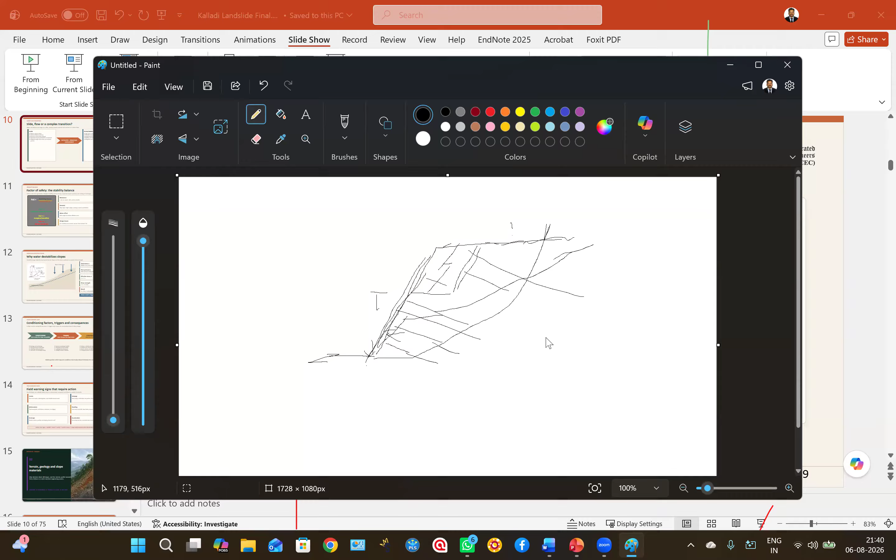In many highway projects, land is the issue, so there may not be sufficient width for giving benches or keeping sufficient slope. I have seen many places with a 10-meter vertical height laterite structure, simply 10 meters, and I am really afraid seeing it. In our Malappuram district also, recently we have seen some slope failures like this.

Site availability is the problem, right of way is the problem. In that case, what we usually do is either put a buttress, or finally make a retaining wall, which is very costly. Otherwise, the buttress will support it and give a passive pressure.

Okay. Thank you, thank you very much, Saki Hussain sir. Thank you, Vijayakumar sir. So there is another question: which type is most suitable, NATM or TBM or any other type?

That is a different subject, but I can answer. TBM means tunnel boring machine. For example, if a 2-kilometer tunnel is there, bringing a TBM is not feasible because its cost itself is more than 100 crores for a real TBM, though Chinese TBMs are available for 30-40 crores. But 100 crores is the minimum standard for getting a standard TBM. So for a 2-kilometer long tunnel, obviously TBM is not feasible.

Suppose there's a 2-kilometer tunnel, and after say 300 meters another tunnel is there. The movement of the TBM from this location, either by road or dragging it, all these things are to be considered, and accordingly we take a call on whether TBM or NATM is feasible. For a shorter length it is not feasible, but for longer length, like in Kishanganga where the total length is more than 14 kilometers, per month we got around 900 meters advance.

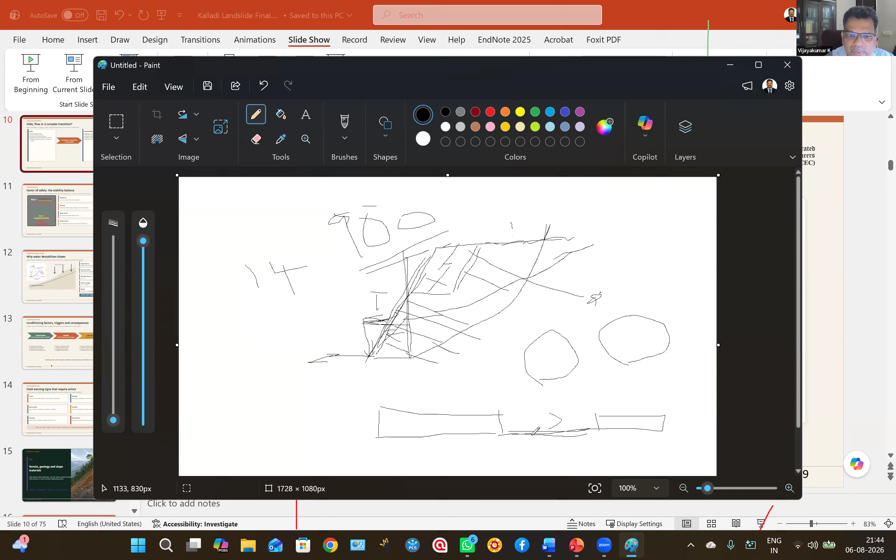For small tunnels, in between in some places if you go with the road at grade level or railway, then we have to shift the tunnel boring machine to that location, which is much costlier. Because the tunnel boring machine will not be moved or shifted in one go; it will be in pieces. The cutter will be there, a reaction frame will be there, then it will enter, then the next module will be connected likewise. So shifting is also a problem for small tunnels.

Yes sir, yes sir, thank you sir. And there is one last question, and I think this is from a person who is very well aware of the technical details of our own Kalladi tunnel. He's asking a question.

It is having about 8 kilometers, two tubes each 8 kilometer. Is it possible by TBM? He's asking, and also he's asking for the suitable shape for the Kalladi tunneling work. Actually, an 8-kilometer tunnel, it is possible.

TBM is possible, and usually this TBM tunnel will be circular. In India, it is circular. Most areas it is circular, but in China they developed not a circular shape but something irregular, not exactly circular. If you can, you can Google it and find out. But in India and rest of the world we usually use circular TBM.

For hydro tunnels, circular is very much effective because its hydraulic radius is more - hydraulic people can understand that. And for deep tunnels, circular is good because bending moment will not be there, since the condition will be hydrostatic. Hydrostatic means pressure everywhere - in a deep tunnel, the pressure will be hydrostatic, remaining same everywhere. So there will be axial force only, no bending moment.

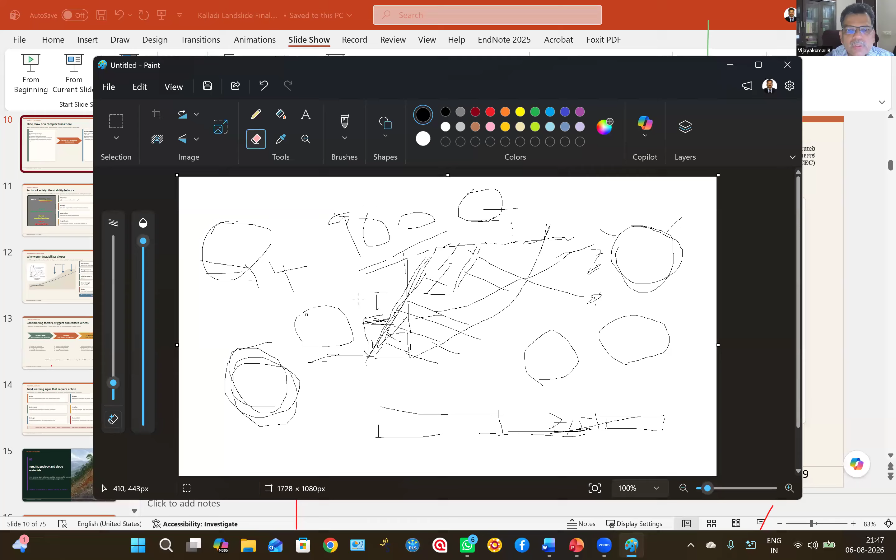For example, some adits connecting tunnels, or cross passages - for suppose there is a tunnel, let me explain. A tunnel is there, and it is an NATM tunnel. We cannot take the muck from the main entry or exit every time, so we usually drill an additional tunnel. These locations are called adits. This shape is only for movement of vehicles for taking the muck out. So this tunnel will be of smaller size, and sometimes if the rock is good, we go with a D shape - right side wall, left side wall, and upper arc, like a semicircle.

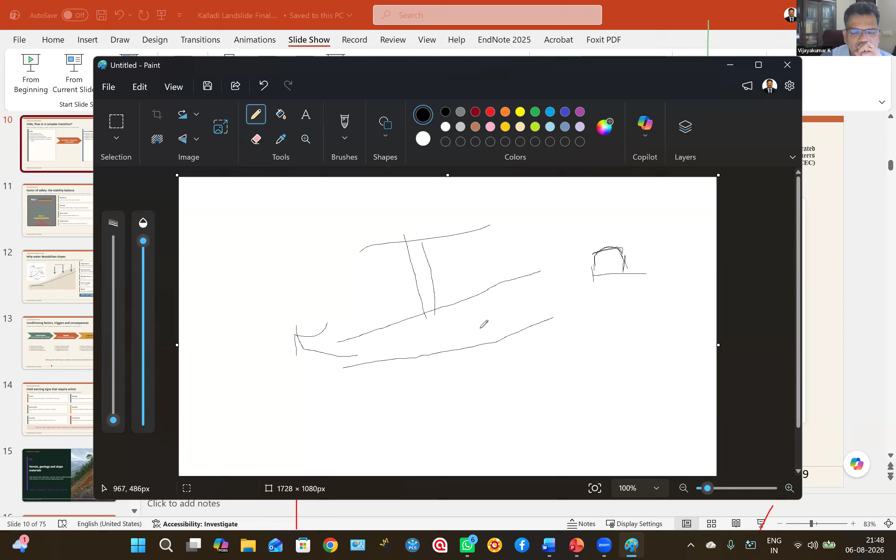But for road tunnel and railway tunnel, the bigger and larger tunnels, we usually go with horseshoe shape. And for TBM, it is circular. The advantage of circular is that for deep tunnels, not shallow tunnels, there won't be bending moment - it will be very less, axial force will be acting. So the concrete, meaning the inner liner and reinforcement, can take maximum compressive force, axial force, and the reinforcement will be very minimal.